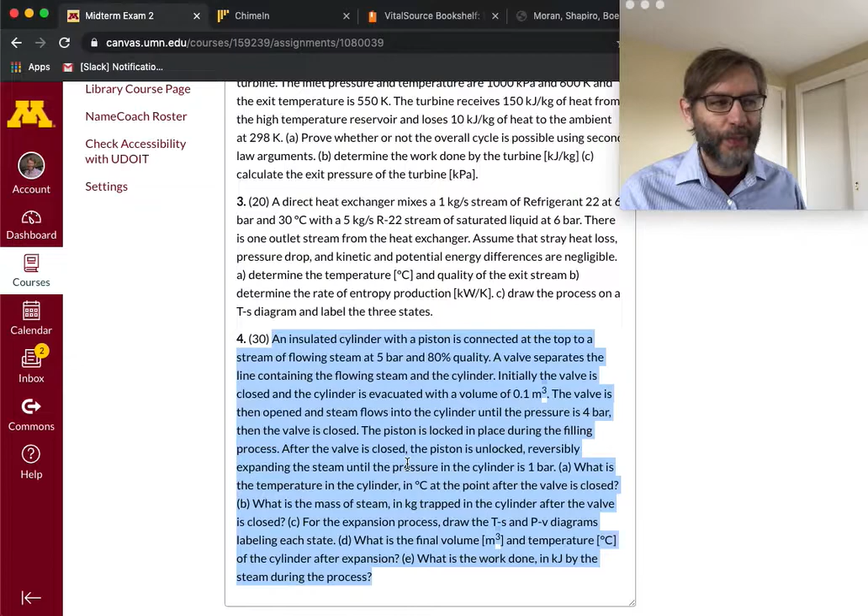Number 4, most people didn't get to. Number 4 is a hard problem, so I expected people would have trouble with this one. This was the one where I'm hoping people got through 1 through 3, and then for number 4, you just did as much as you could.

Number 4 was hard — a transient problem that involved steam flowing in a pipe, and then the steam going into a piston, which then was locked and then expanded. So that's kind of a tricky situation. We definitely covered this material in class, though what you needed to do to get to this is difficult.

Here's what I'll do: I'll grade the exams with the TAs, hopefully next week, and then I'll publish a video lecture going through the solutions, so you have an idea as we go towards the final of what we expect and how to put these things together.

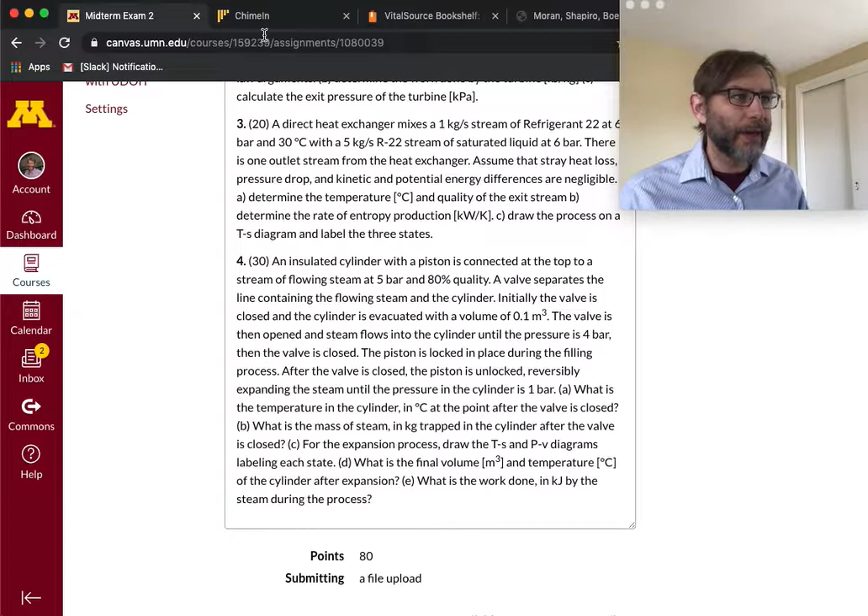All right, let's move on from the exam and start talking about the new material. What we have to do today is finish up chapter 6. I really just want to be done with chapter 6 so that Monday, fresh start, we can start on cycles and start talking about cycles. We only have a couple weeks left of the semester.

Lola's upset about the exam too. Come here, Lola. Yeah, she was stressed out too. Yeah, see, she's stressed out right now.

Okay, all right, so let's see. Let's look at the survey from last time.

So the survey from last time is for an incompressible substance, the change in entropy for an isentropic process. As you remember, isentropic processes are adiabatic and reversible. Is dependent on, choose one,

Only temperature. Temperature and pressure would have been the right answer if we were talking about a gas, like an ideal gas. But when I said incompressible, I mean a liquid, and for a liquid it's only a function of temperature. For an isentropic process there shouldn't be any heat transfer - it's adiabatic, so pressure only is not correct.

So yeah, most people got this one correct.

Let's move on to new material here. One thing I want to cover first and get out of the way is to talk about these tabulated values of PR and VR.

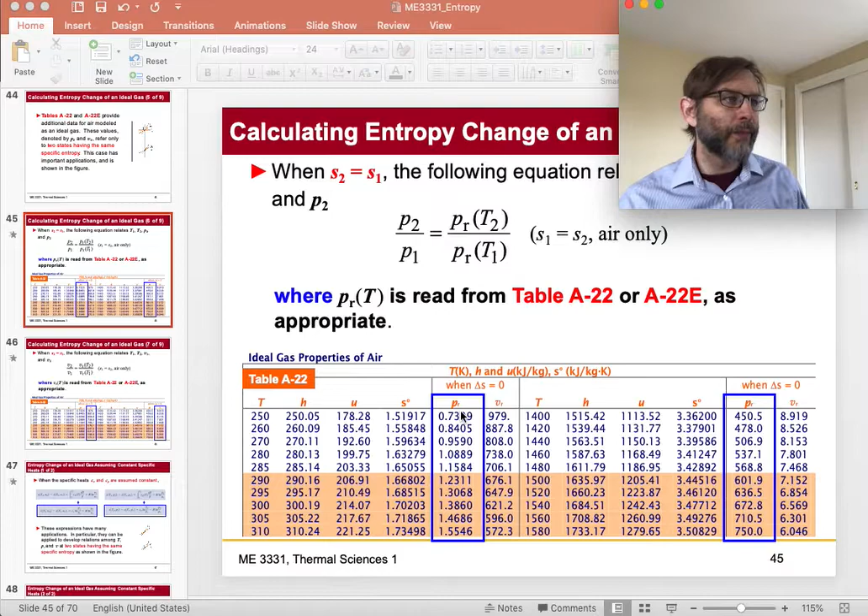So PR and VR are for talking about reversible - oh sorry, let me just get rid of this. So what we're talking about is a process where S1 equals S2, a reversible process with no heat transfer, so that'd be an isentropic process.

S2 equals S1. So if we want to find out for an isentropic process how to calculate the pressure change or the volume change, we can essentially - this is based on the TDS equations we developed last lecture - say P2 over P1 equals PR at T2 over PR at T1.

So these are just like a pressure ratio. What you can do is use this equation and use the tables to determine what the pressure ratio would be for an isentropic process. It's pretty straightforward - we're going to do an example that uses this a little bit later.

So I just want to let you know, you can use this S naught thing and look up S naught with a pressure correction, which is what we've been doing so far. Or you can use these PR and VR, and look in the air tables, for example.

So this is only for ideal gas, or any ideal gas. For the air tables, you can look up PR and VR for isentropic processes and understand the pressure and volume ratios very easily using those tables.

Okay, so yeah, we'll do an example of this. It's pretty easy to use and maybe a little bit of a shortcut if you want to do an isentropic process. Otherwise you can just use the TDS equation on the ideal gas entropy change that we were using before. VR is the same.

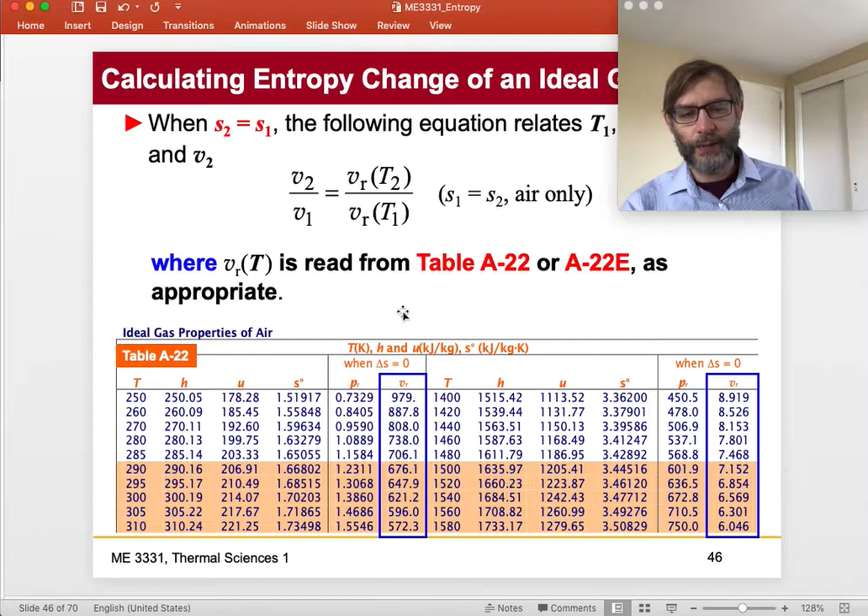So V2 over V1 for an isentropic process equals VR at T2 over VR at T1. So then we'll do an example of this. But this is only for air, for this table, and for ideal gas, and for isentropic process where S2 equals S1. Okay, we already covered this.

So I just wanted to get through that stuff from last time. We talked about the isentropic relations, T2 over T1, P2 over P1. That's always really nice to use for an ideal gas. We didn't do that in the exam, but you can expect we'll do something like that in the future.

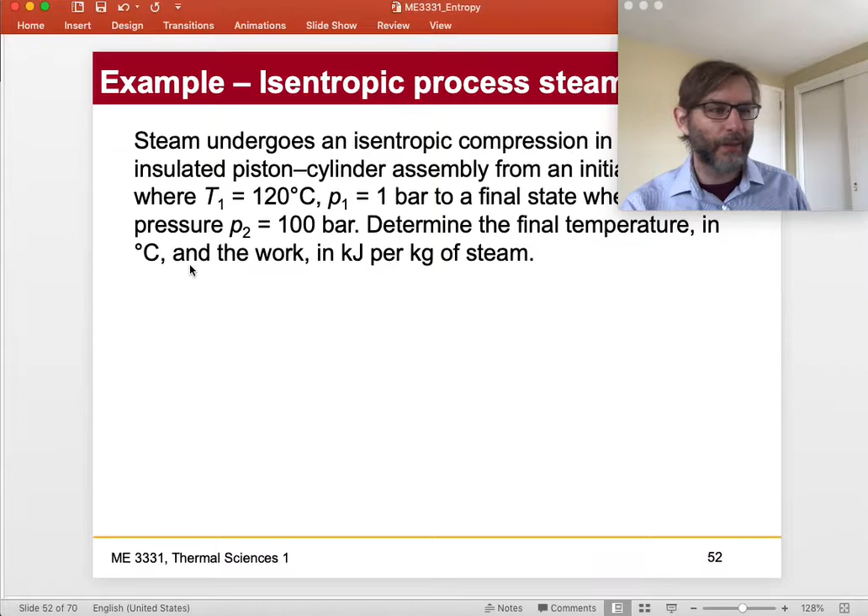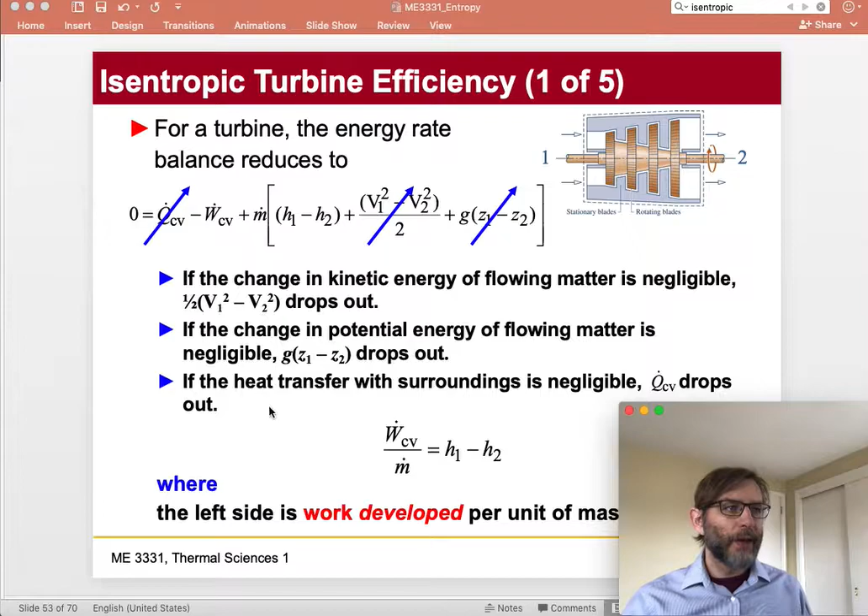Now for an isentropic turbine, we have the second law, entropy balance. So the entropy balance is 0 because it's steady state, so dS_CV/dt equals 0.

Adiabatic, right? So it's isentropic, so this goes to zero. Essentially what you have for any turbine is the rate of entropy production over m dot equals S1 minus S2, which is greater than or equal to zero. So when you have a reversible turbine, which is the isentropic case, you have S1 equal to S2.

If you look at this diagram, the Mollier diagram, the H and S diagram, you can see that for an isentropic turbine you have 1 to 2S, which is the expansion from 1 to 2S, and then you have the actual, which is 1 to 2, which is the case where you would make entropy. So the state labeled 2S in the figure would obtain only in an isentropic expansion from the inlet state to the specified pressure. We would have 2S only in the absence of internal irreversibilities.

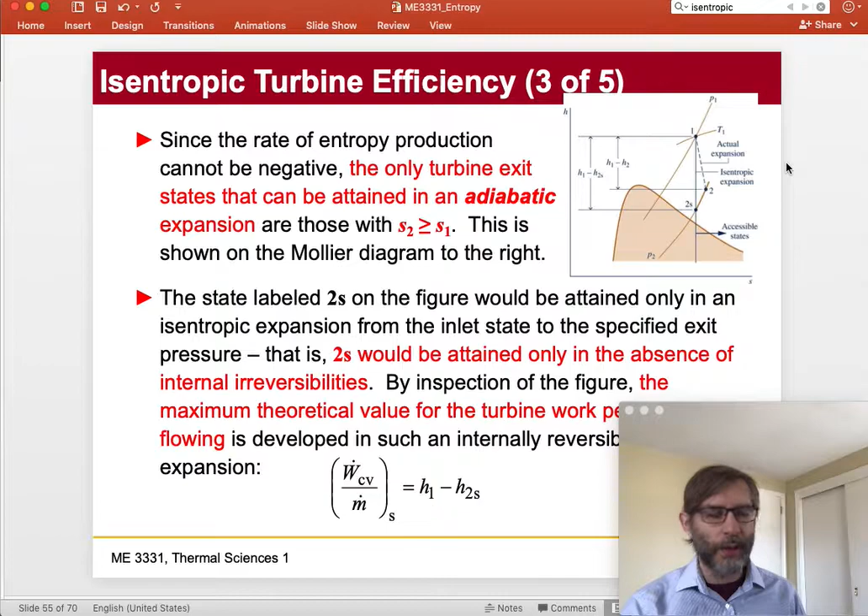So the maximum theoretical work that you can make from the turbine would be H1 minus H2S. The specific work, in kilojoules per kilogram, would be H1 minus H2S. That's the maximum amount of work you can develop in a turbine. Similarly, for a compressor, we go the other direction. You'd be compressing, but similarly, the lowest amount of work you would put in for a compressor would be H2S minus H1.

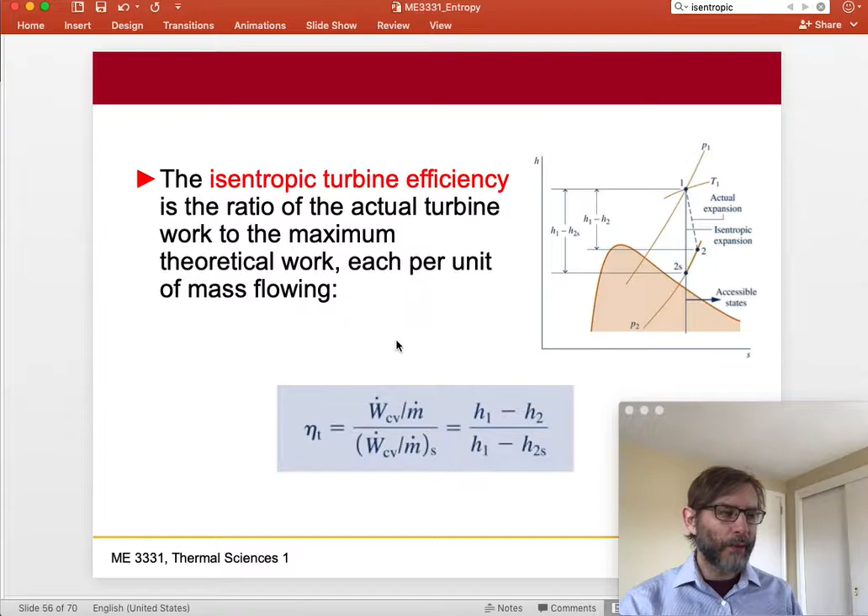So therefore we can define an efficiency metric, which is sort of what we did in an example last week. You can have this work over the work ideal. The actual work would be H1 minus H2 for an adiabatic turbine, and the theoretical work would be the isentropic work over mass flow rate, which would be H1 minus H2S. So this is what we call the isentropic efficiency. Sometimes people call it the first law efficiency of a turbine, but it's nice to call it isentropic efficiency because it's not in over out. It's more like the amount of work you get versus how much work you'd actually get out of the process.

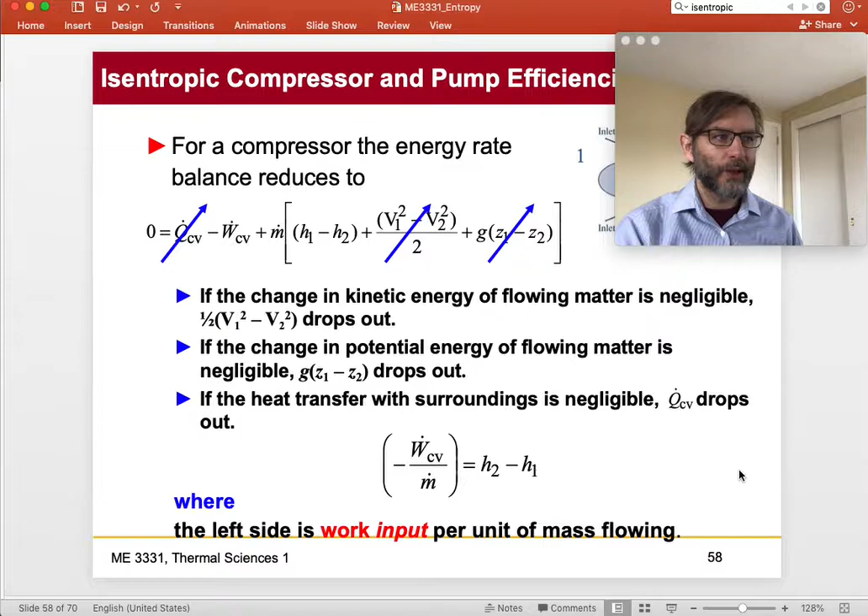We'll do an example of this to show you how it works. Same thing goes for the compressor and pump - they have the same equation essentially. You've got work equals H1 minus H2, just that work is going in, which means the work is negative. You have the same deal: S1 equals S2. This is like the same slide, except you have a compressor on this figure, so it's 1 to 2. Remember, before it was 1 on top and 2 on the bottom - now it's 1 on the bottom and 2 on top. So for 1 to 2 you're generating entropy, and for 1 to 2S entropy stays constant.

Essentially it's the exact same thing, except that the isentropic efficiency here is the ideal over the actual - it's the inverse for the compressor, because the ideal amount of work is lower than actual. You want an efficiency metric to be between 0 and 1. The minimum amount of work you can put in is the isentropic work for a compressor or pump, and the actual work is always going to be higher. So this ratio is going to be below 1, between 0 and 1. The pump efficiency is defined similarly.

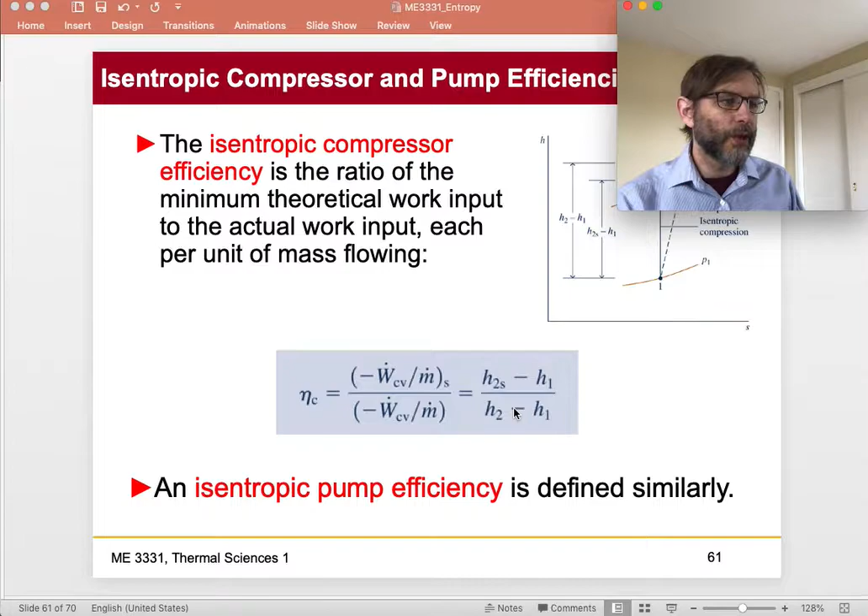I believe there's an example here - yeah, I have an example. Let's do this example, and this is going to be great because it's going to use both. Air enters - you can use the PR as well as the isentropic efficiency stuff. All right, let's get here, let's get my iPad going.

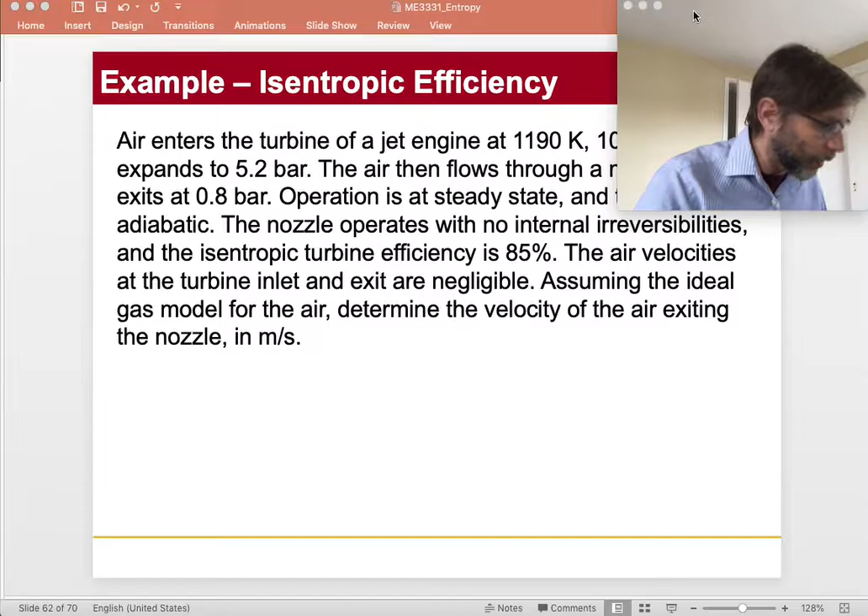So air enters the turbine of a jet engine at 1190 K and 10.8 bar and expands to 5.2 bar. The air then flows through a nozzle and exits at 0.8 bar. Operation is at steady state and the flow is adiabatic. The nozzle operates with no internal irreversibilities, and the isentropic turbine efficiency is 85%. The air velocities at the turbine inlet and exit are negligible. Assuming the ideal gas model for the air, determine the velocity of the air exiting the nozzle.

Okay, so it's a coupled problem, right? But they're giving us an isentropic efficiency. That's what makes this problem interesting. And then so we can figure it out.

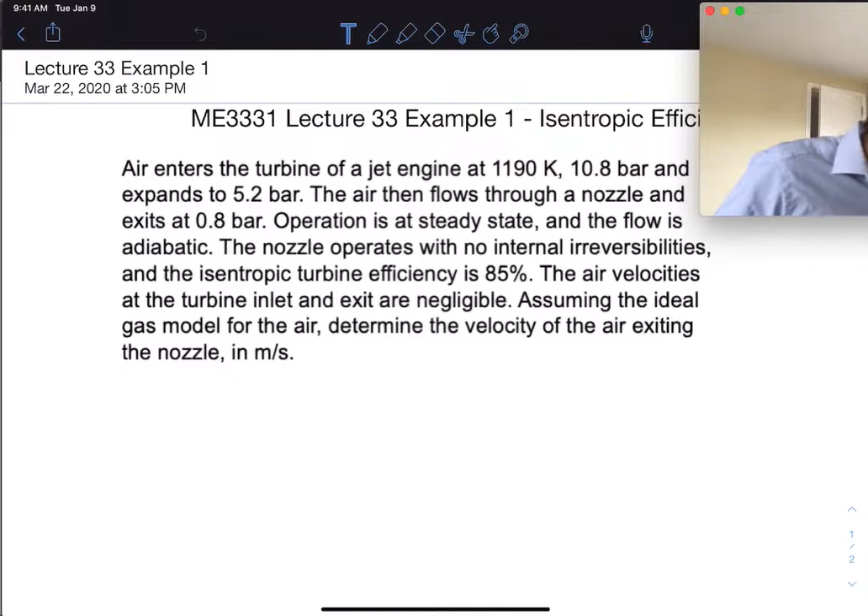All right, Lola, you're gonna have to go somewhere else so I can write. There you go. Okay. Now I got cat hair on my iPad. Okay, all right, it's shedding season.

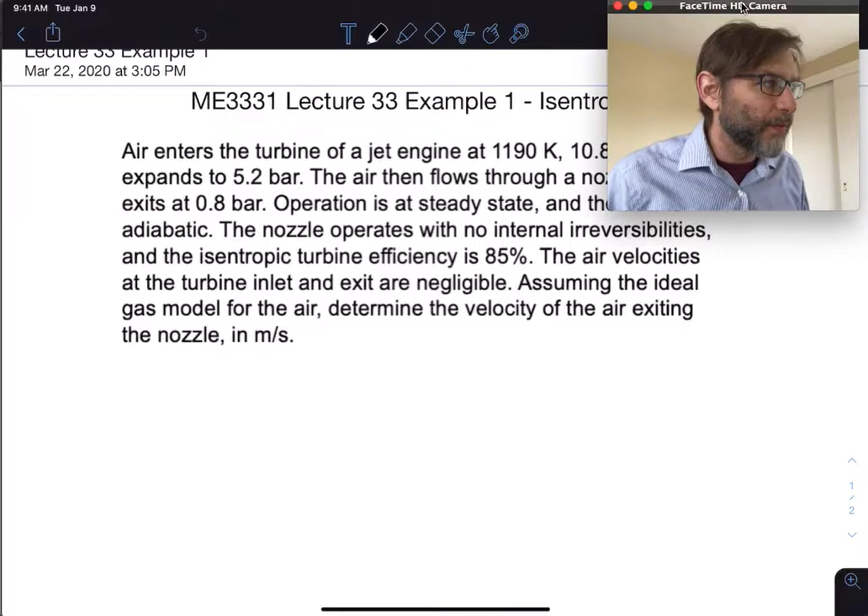All right, so now let's get here. So what are we gonna do? First things first, we're gonna write the known. Somebody asked me this question, as they always do before an exam: should we use known and find in the exam problems? I say yes, because that's what we've been doing, so default, do what we've been doing. I think it's helpful - it gets your thoughts straight on what you're trying to do, it makes you read the problem. Sometimes people miss things in the problem if they don't write it down. It just gets your thoughts straight on what you're going to do. It's part of the normal engineering procedure.

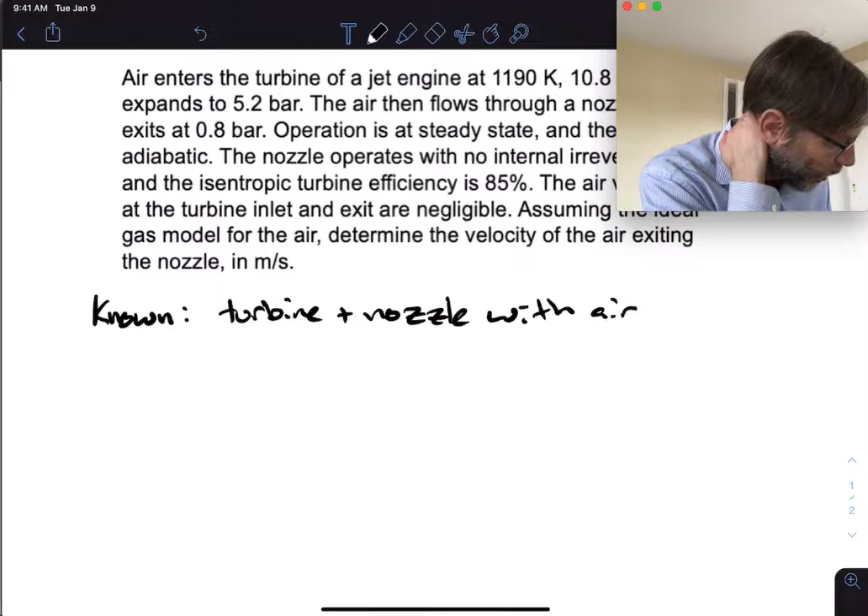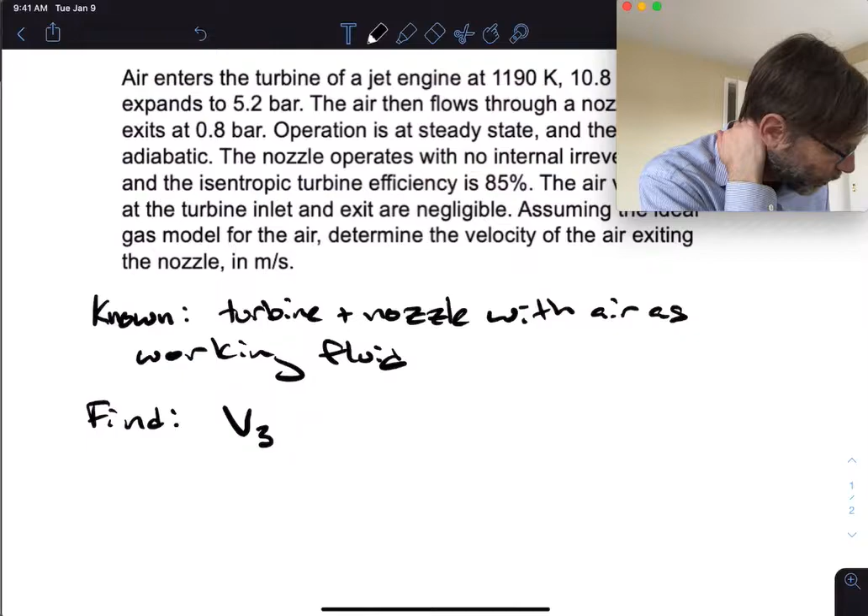So anyways, what's known is that we have a turbine plus nozzle with air as working fluid. What we have to find in this case is the exit velocity, so we're finding v. Well, we're gonna call it v3 because there's two components, right?

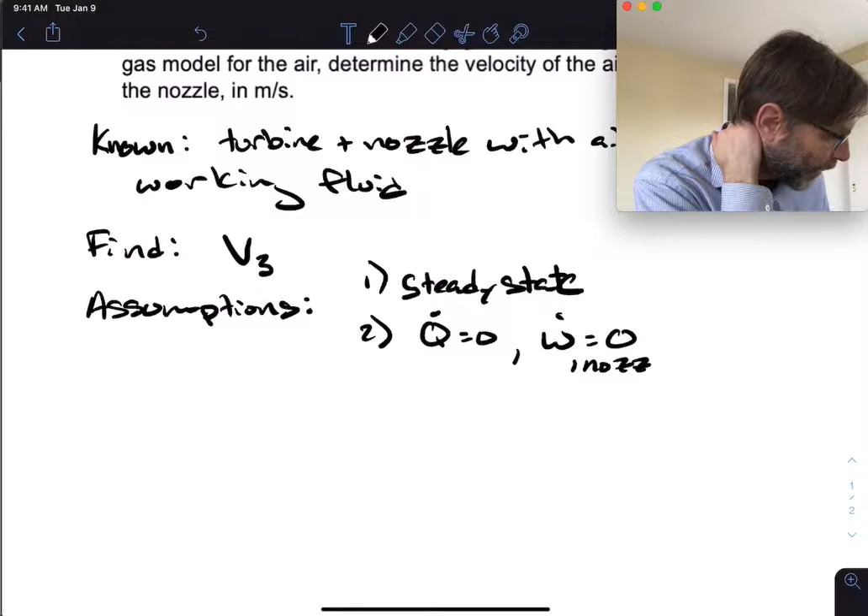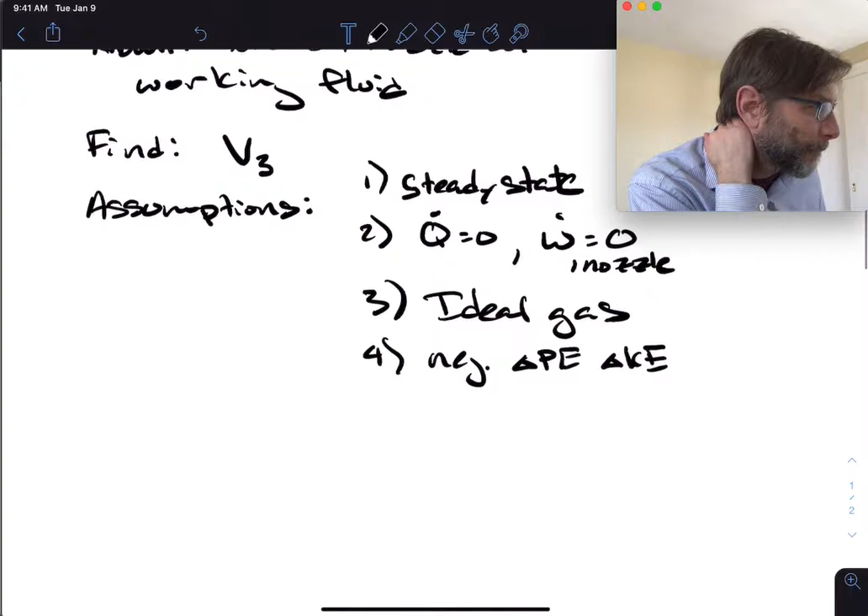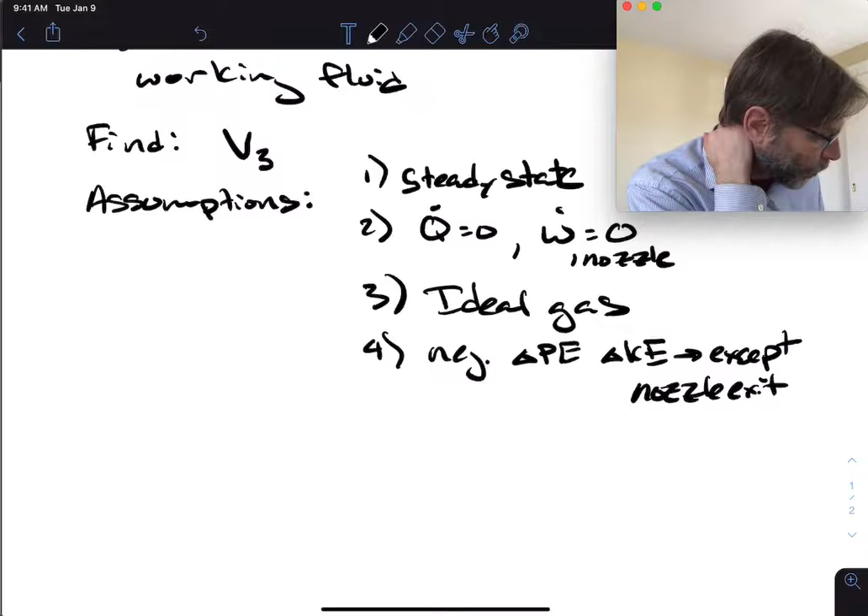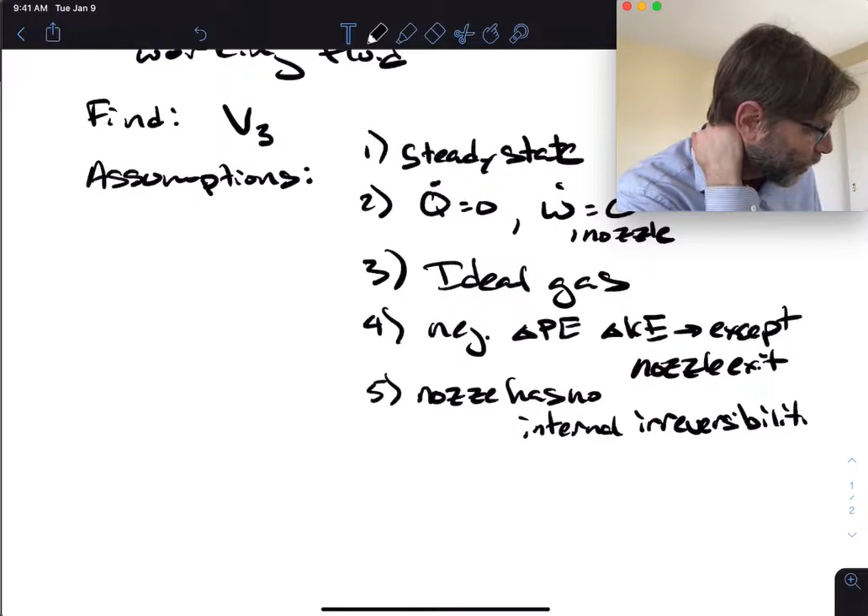So if we make some assumptions here. First, we're gonna say steady state. Second, we are assuming that q dot equals 0, adiabatic, and that work dot equals 0 for the nozzle - obviously the turbine has some work. Third, I think we're going to assume ideal gas. Fourth, we're going to neglect delta PE and KE - I think we're going to neglect KE from the, except at the nozzle exit. And then fifth is going to be the nozzle has no internal irreversibilities. So a lot of assumptions in this problem.

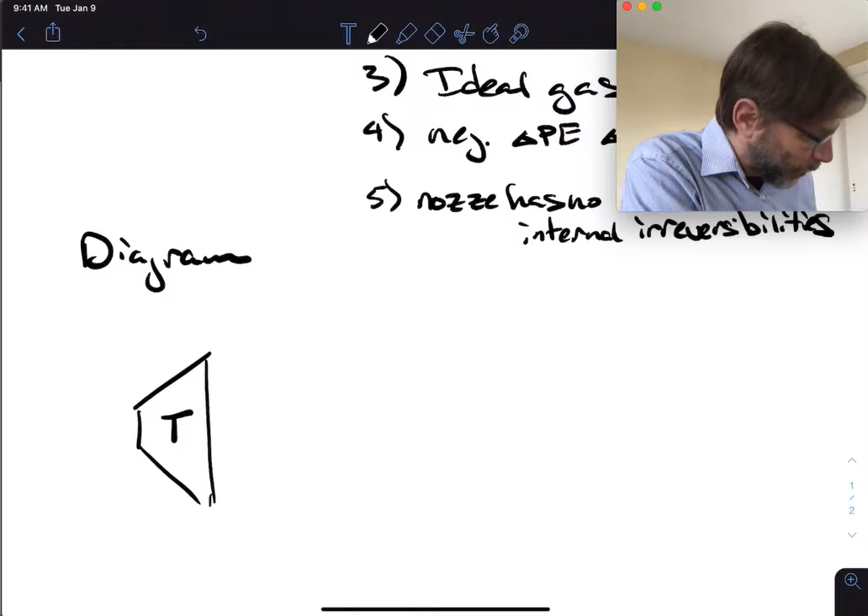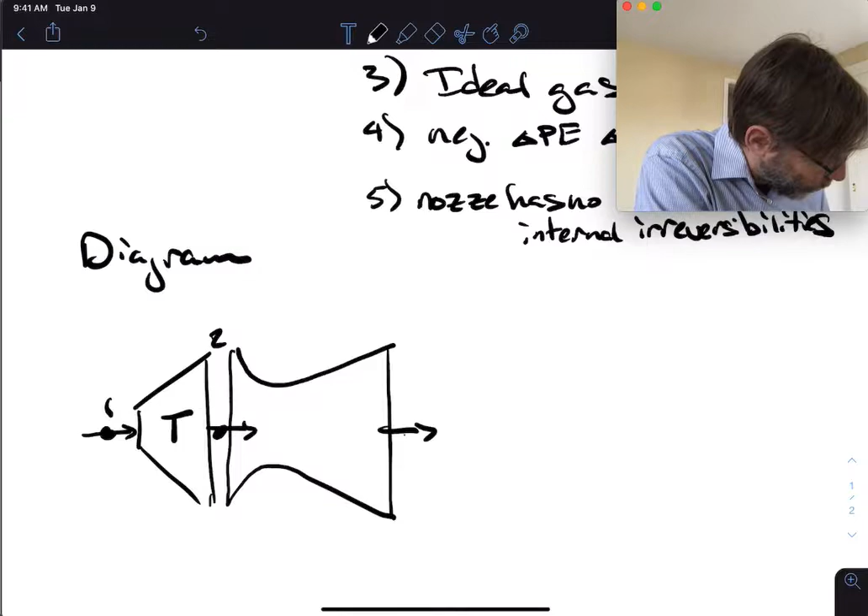All right, let's make the diagram. So to make the diagram, it's going to look like this. There's going to be a turbine, call it T, you have stuff coming in, and it's a radial flow turbine. And then we're going to have a nozzle, so we're going to have some sort of nozzle that looks like this - imagine like a fighter jet or something. It's got a turbine and a nozzle, right? So we're going to call this state 1, call this state 2, and coming out state 3. It's a converging diverging nozzle - it doesn't matter, we could have made it just tapered down or something like that. It's probably a little bit confusing to make it a converging diverging nozzle, but okay.

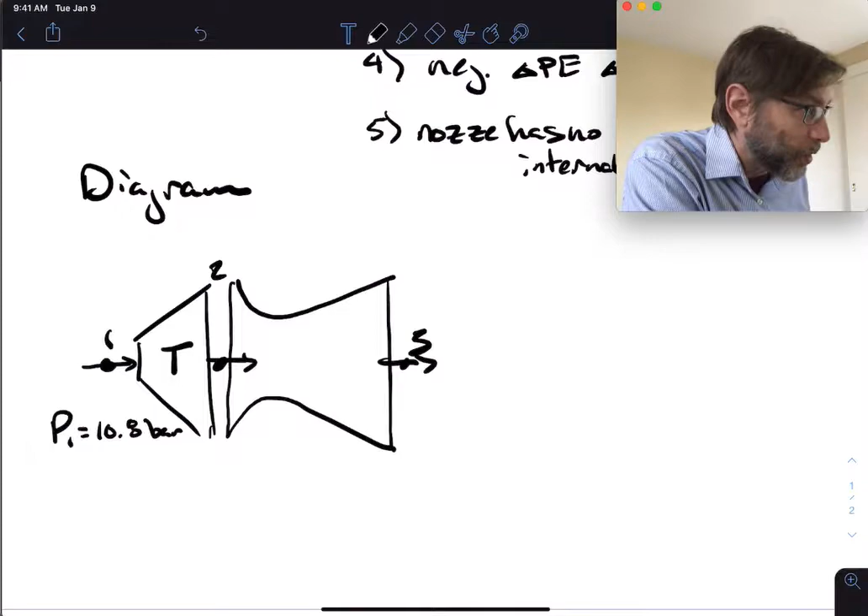What we're given is that P1 equals 10.8 bar, and T1 equals 1190 K. State 2, we have P2 equals 5.2 bar, and P3 equals 0.8 bar. It's a little under expanded.

Okay, we're going to make ourselves a T-S diagram just to explain this thing. And we got different pressures, right? So I'm just going to draw the pressures that we're operating at: 0.8 bar, 5.2 bar, and 10.8 bar. Okay, so now we have two different processes, right? So we have 1 to 2, 2 to 3.

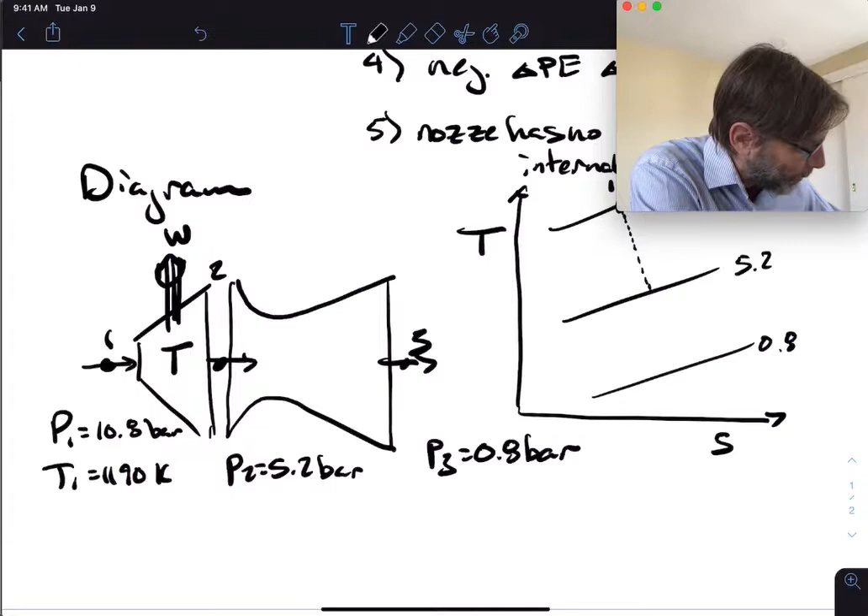So 1 to 2 is expanding through the turbine. The turbine's making some work - I assume it's making some work, work is coming out of this thing, positive. And then what we're going to do is, from state 1 at 10.8 bar, we're going to expand it down to something here, so state 2 is somewhere down here, right? It's an 85% isentropic efficient turbine.

So there's going to be a line here, this is going to be our 2s, our isentropic idealized turbine. Okay, 2s - that looks straight. And then from 2 like this, and then we're going to have from 2 to 3 is actually no irreversibility.

So we're going to assume that this is straight. Ooh, it actually made a straight line, didn't it? How do I do that? I don't know, that was cool though. I should figure that out. I'm really having a hard time making this look straight. All right, that's pretty good.

3 is there. Okay, so this is what we have. This is the kind of TS diagram that we're talking about. We don't know any of the temperatures, I don't think.

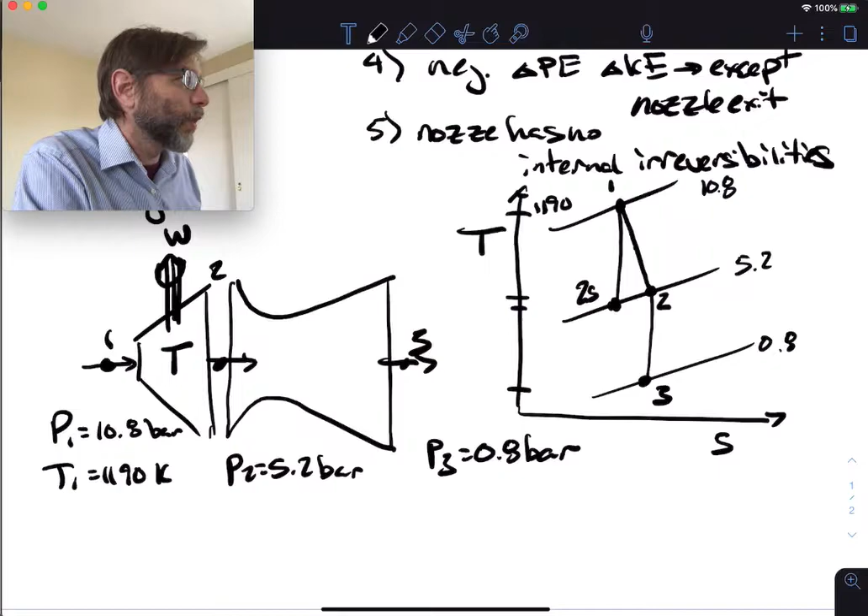Oh yeah, we do. We know T1, so T1 is 1190. We don't know T2, T2S, or T3. We don't know any of those guys. All right, so we have to figure that out. But we do know that we have 85% isentropic efficiency.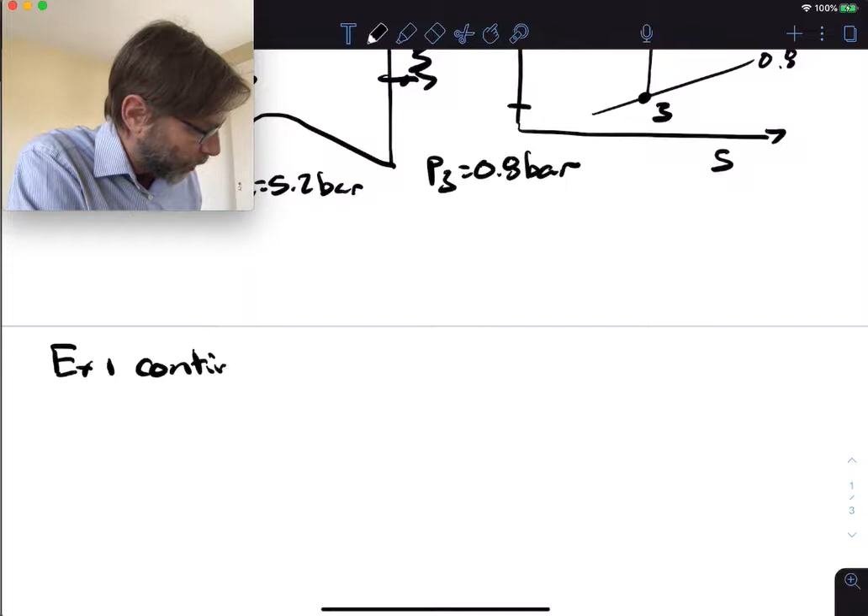All right, so let's do continued here. So now let's put our analysis here. So in our TS diagram, we put as much as we could in there. As you get good at these, and as we do this thermodynamic cycles, you can start making the TS diagram right away. You don't have to make it as part of the problem later, right? You kind of deduce what's going on based on what's happening in the problem statement. And so you know how to essentially draw the diagram roughly right from the beginning, okay? And that's what I kind of would hope you do.

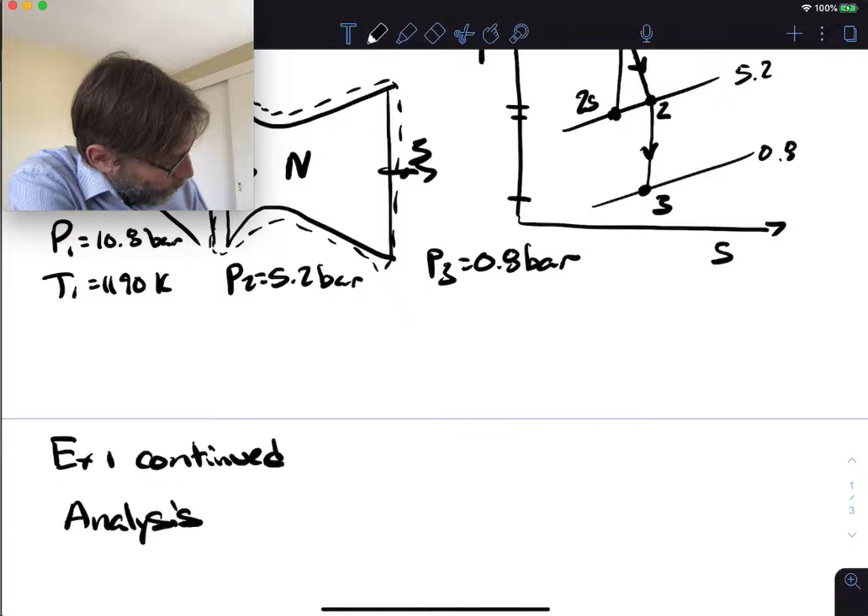So this is a nozzle, right? And then we'll draw our diagram. So essentially we can make the whole thing our system. I don't know if we're going to do that. We're probably going to make individual systems. We'll probably have 2 control volumes, CV1 and CV2. I imagine we're going to analyze them piecewise.

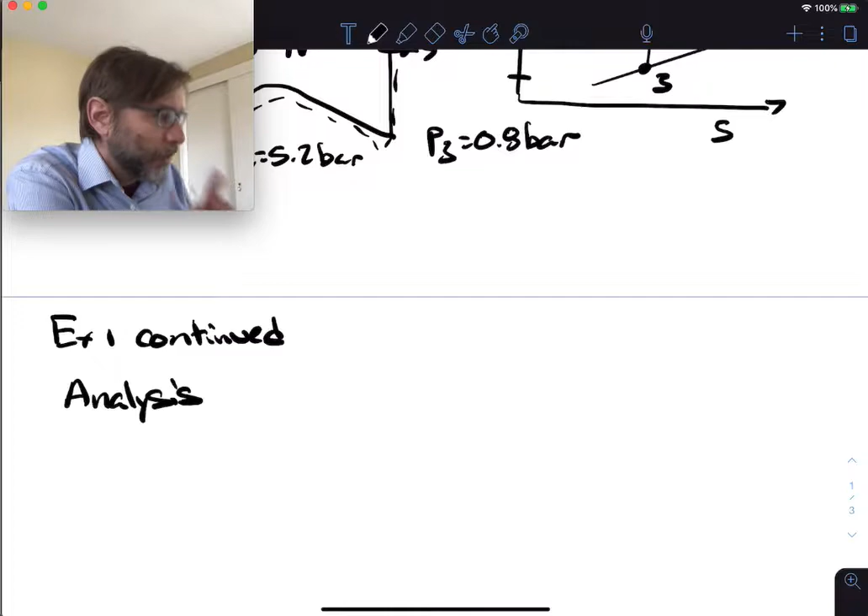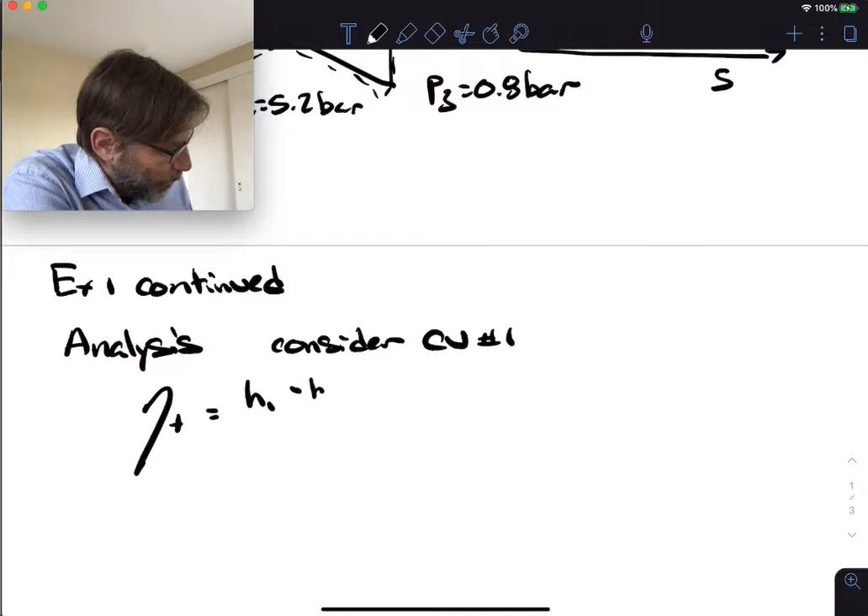Okay, so let's find state 2. So let's consider control volume number 1. Okay, considering control volume number 1, let's just break out our isentropic efficiency. So eta T, which would be the isentropic efficiency of a turbine, would be H1 minus H2 over H1 minus H2S. Okay, so that's the isentropic efficiency of a turbine.

So then we're going to find what H2 is. H2 equals H1 minus eta T times H1 minus H2S. All right, so since we have the temperature at state 1, we definitely know what H is, right? Because we can find that pretty easily. All right, to define H2S though, it's going to be a little tricky.

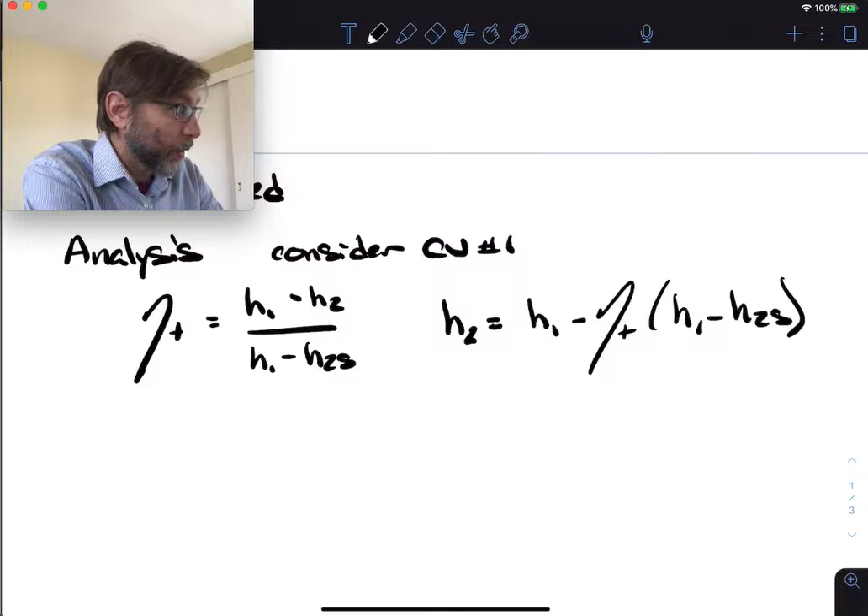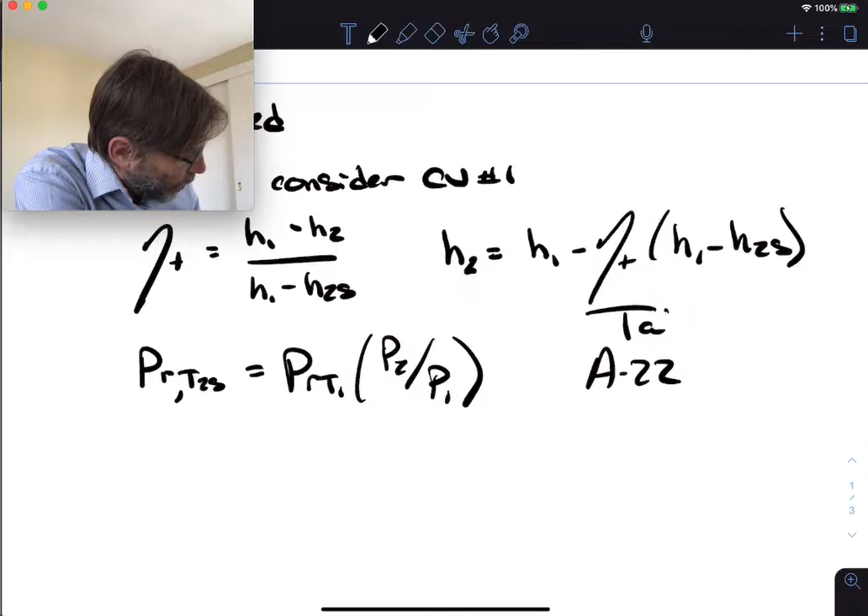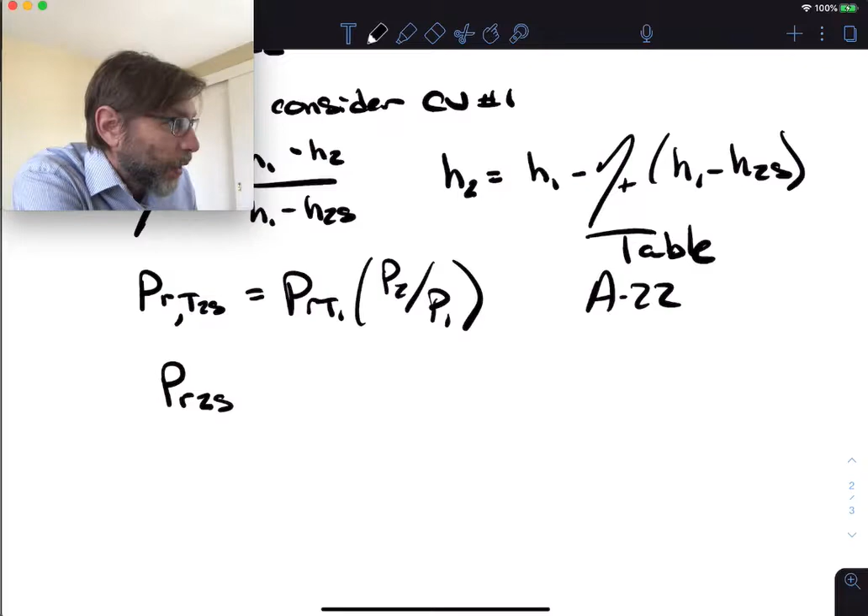Okay, so now what we're going to do here is we're going to use table A22, to find out what's going on here. So PR2, or PR2S, is equal to 230. So that's PR at T1. So PR at T1, we'll just say at 1, PR1 equals 230. And there's no units on PR because it's a ratio, so there's no units on that. But there is units on the pressure. There's just no units on PR and VR.

And then, so we know the pressure ratio, so we can find out what this is. So if we look it up, we can just sort of interpret that T2S... oh, I'm sorry, I will go back. I went a little too far. PR2S is equal to 230 times the ratio of 5.2 over 10.8. Okay, and this is equal to 110.8, and so this is PR2.

So if we look at this at the table, we're going to get H2S is essentially equal to 1038 approximately, and T2S is approximately equal to 992K or 993K. Okay, all right, so we have 990... this is kind of poorly written. All right, 993K. Okay, now, so then we can find H2.

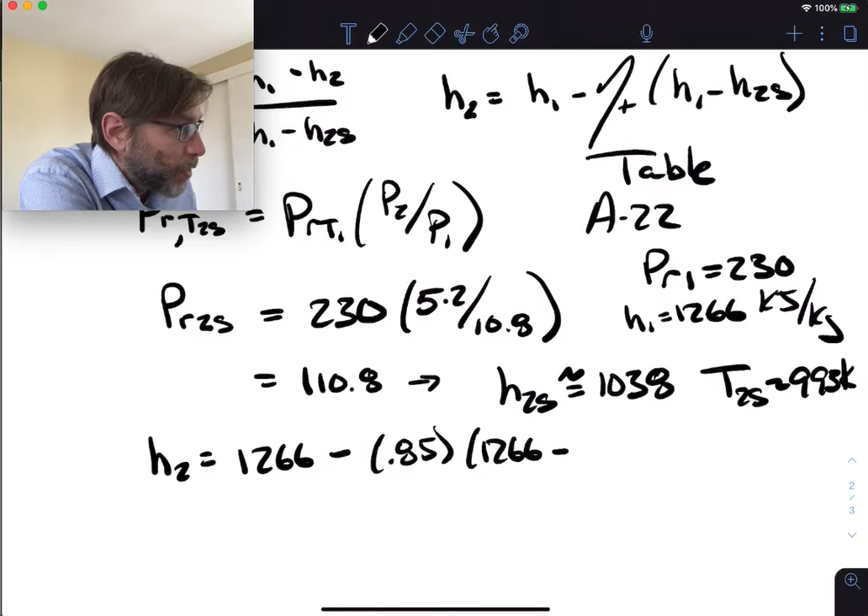So H2 actually, so we don't have to look that up on the table. We just use the isentropic function, and we get H2 equals 1266, which is, I said, what H1 is. So H1 equals 1266 minus, 1266 minus 0.85, which is the isentropic efficiency, times 1266 minus H2S, which was 1038. Okay, and this ends up giving us something like H2 equals 1072 kilojoules per kilogram.

Make sure I put my units in here. Okay, kilojoules per kilogram, so that's H2. Now interpolating, we can find T2 is equal to about 1023K, and PR2 is equal to 124.7. So now we have PR2.

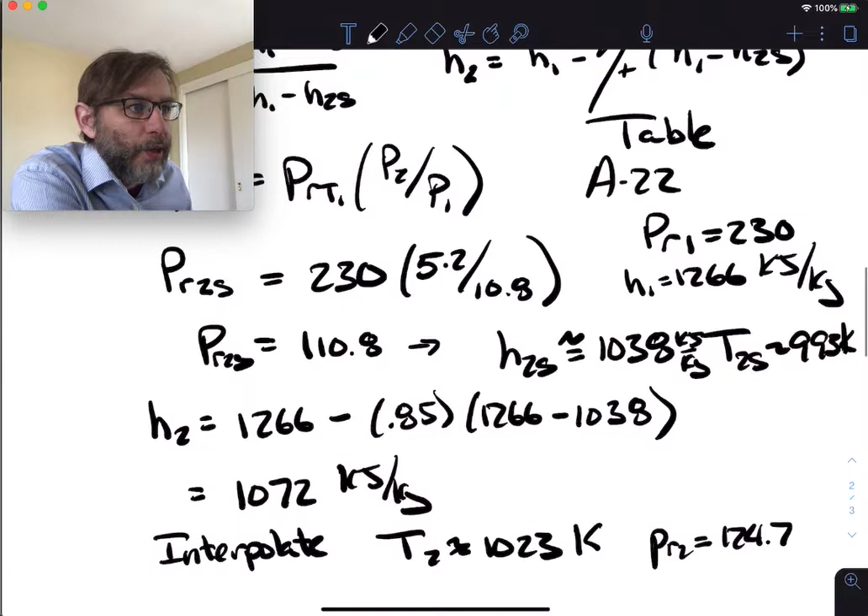So we have PR1 and PR2S. PR2S is... I'm sorry, 110.8. But now PR2 is actually 124.7. Make sure I get this right. So this is PR2S up here, which is 110.8, and PR2 is 124.7.

Okay, and now we can find out for the nozzle, for control volume 2, from state 2 to 3, we have PR3, which is at the isentropic condition, because it's an isentropic nozzle, which doesn't really happen, right? You don't really have an isentropic nozzle, but okay, so we assume we have an isentropic nozzle. PR at T2,

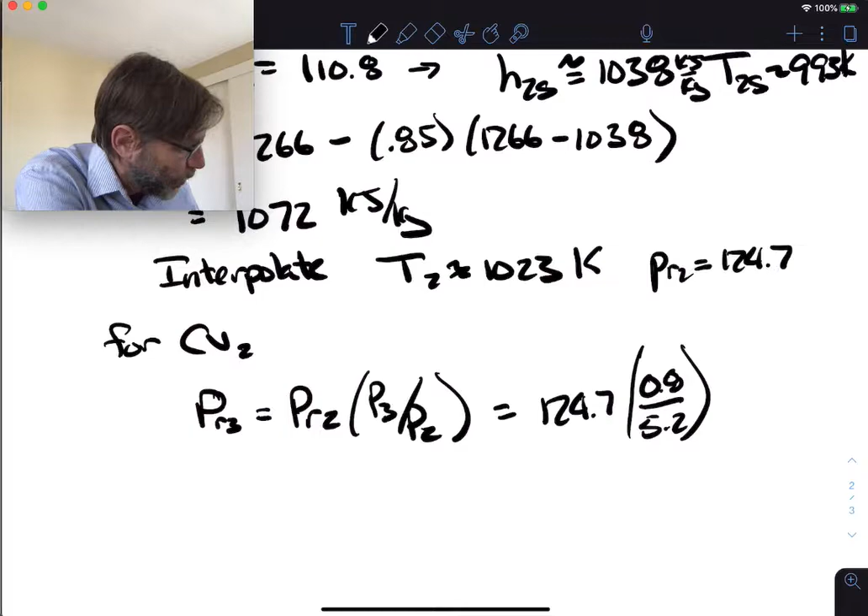and then P3 over P2. So using the PR function again, we end up getting 124.7, which is PR2, times the ratio of the pressure, which is 0.8 over 5.2. And this ends up getting us a PR3 value of 19.191 from the table.

And then we can interpolate that as H3 equals H3S, which is the isentropic enthalpy, which is 634 kilojoules per kilogram. And the T3 is equal to 625.6. All right, so now we know what that is.

Now, the only thing we have to do now is figure out what the velocity is, okay? So for that, we're going to use the first law for control volume 2. So 0 equals Q dot minus W dot plus M dot times H1 minus H2, and we'll skip the potential energy, and put a square bracket here for V2 squared over 2 minus V3 squared over 2.

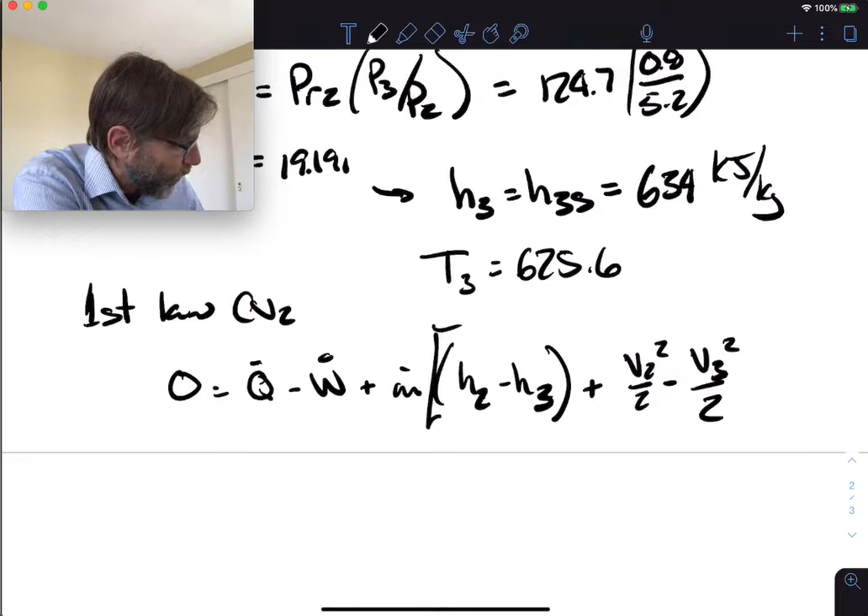I'm sorry, this is supposed to be 2 and 3. And then, based on our diagram, this guy goes to 0. We assume this is 0. We're assuming the kinetic energy is negligible at the inlet to the nozzle, but at the outlet to the nozzle, it's something.

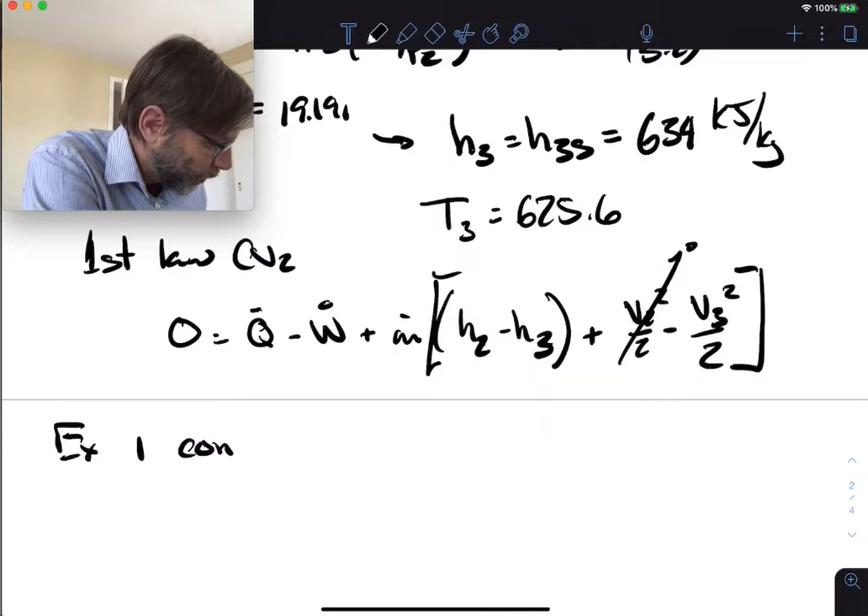Okay, so continuing now, all we have to do is find this. So V2 - this term goes to 0 in the nozzle, and this term goes to 0 in the nozzle as well. So really all we're left with is V2 equals, and the M dot drops off because it's divided by 0.

So V2 equals the square root of 2 times H2 minus H3S, okay? And then this ends up being 2 times H2, which we already know is 1072, minus 634. And then, of course, we have to do this 1000 correction, usually to get the kilojoules into joules per kilojoule.

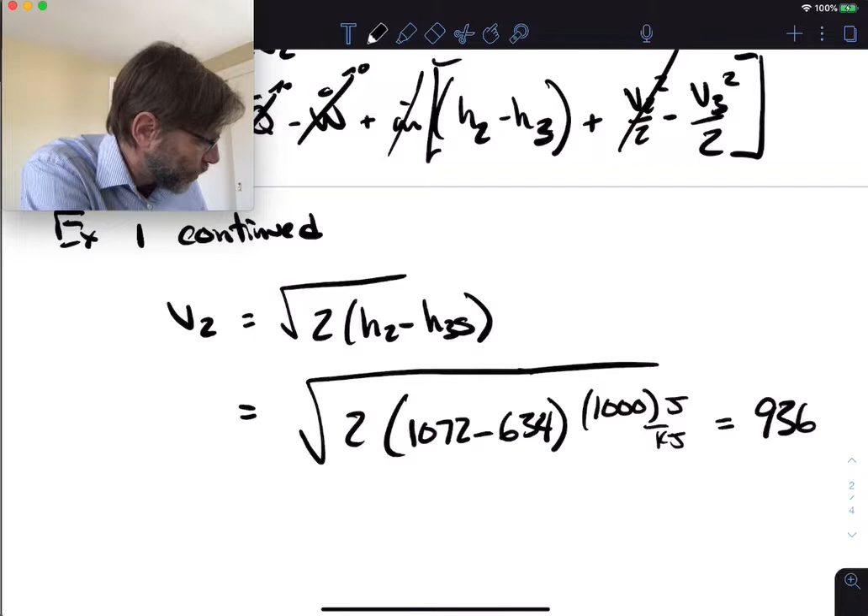And then this ends up being, to get us to meters per second, so 935, essentially 936 meters per second. When you're doing the velocity stuff, you got to make sure you have that factor of 1000 in there, or else you're going to run into trouble with the kilojoules. All right, so that's the answer.

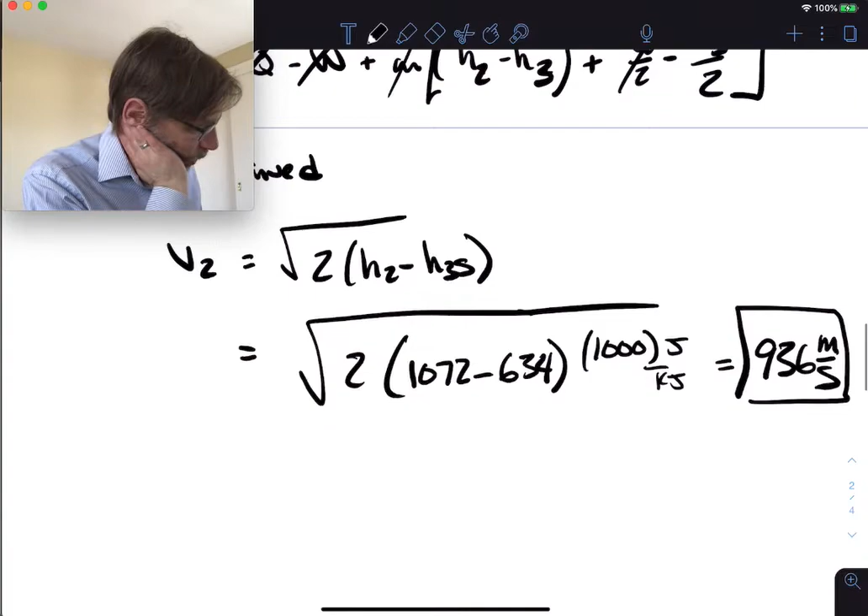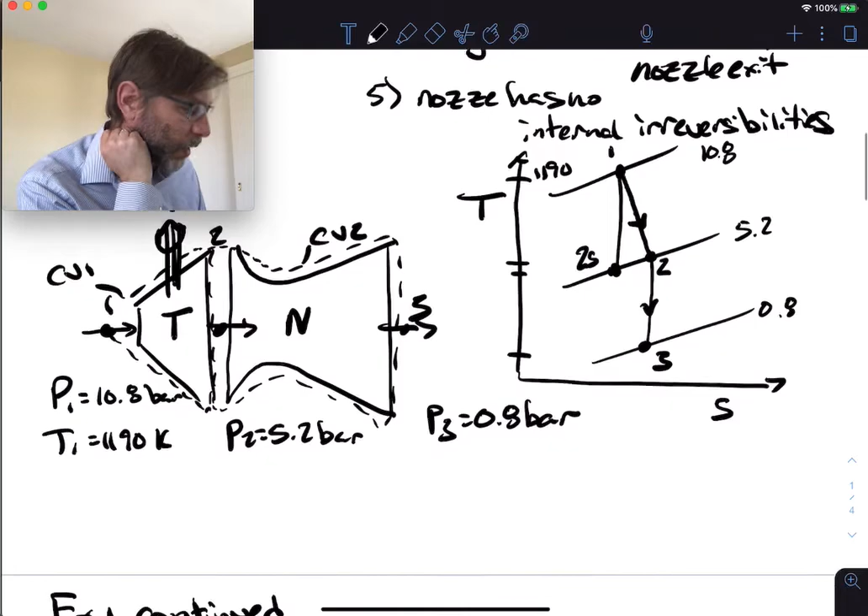So now we've kind of shown that this is really useful. This PR is really useful for isentropic processes. It's sort of a way to easily use the tables for isentropic processes. And even though the turbine itself wasn't isentropic, we can use the isentropic enthalpy and temperature to solve for the real one using the isentropic efficiency. Okay, so hopefully this example gives you a good sample of what to do.

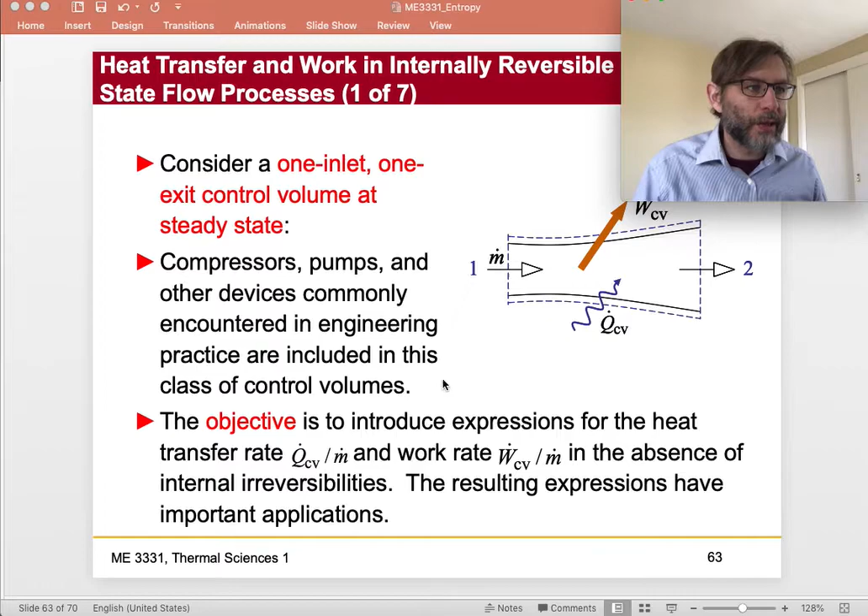All right, next thing I want to do is talk about heat transfer and work in internally reversible steady flow. Consider a one inlet, one outlet control volume in steady state. We have a lot of things like this: compressors, pumps, nozzles, valves, other things like that. The objective is to introduce expressions for the heat transfer rate and the work rate in absence of internal irreversibilities. The resulting expressions have important applications and are something we want to examine.

So the agreement of the discussion on energy transfer by heat to a closed system doing an internally reversible process, we have this - reversible means the sigma goes away, right? So we have Q over M dot, so this is some Q of the CV, equals the integral from 1 to 2 of T dS, right? Where the internally reversible subscript shows that the expression applies only in the absence of internal irreversibilities, i.e. when sigma is 0, okay?

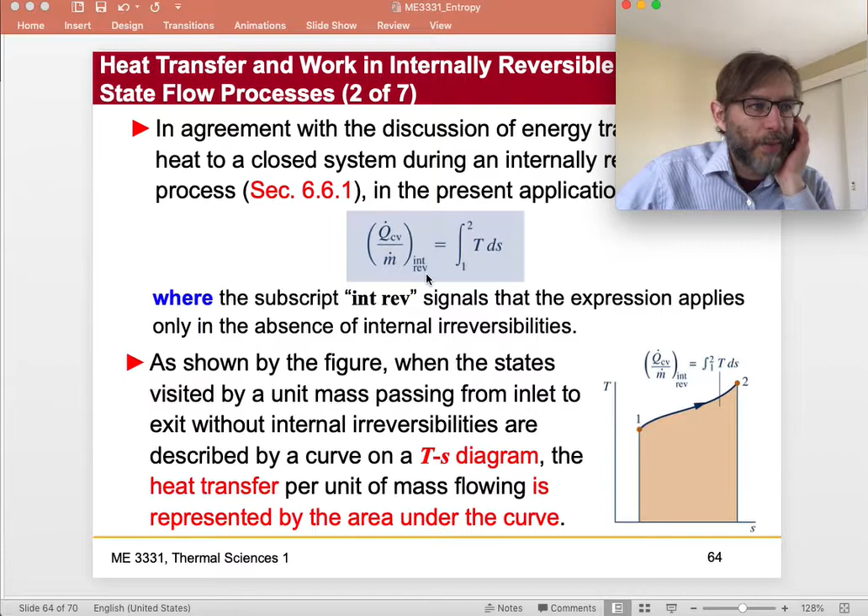As shown by the figure, when the states visited by a unit mass passing from inlet to exit without internal irreversibilities are described by a T-S diagram, the heat transfer is the area under the curve, which we know. Now, neglecting both kinetic and potential energies, an energy rate balance for the control volume reduces to the following, for one inlet, one outlet.

You'd get rid of kinetic and potential. You end up getting work equals Q plus H1 minus H2. And then you end up putting the Q in from the second law entropy balance into the first law, so you get work, little w, work over m dot equals power over m dot, equal to the integral of TdS plus H1 minus H2.

So entropy and pressure changes are related by the TdS equation, and we can integrate this for the exit, and we get the following: TdS equals H2 minus H1 minus VdP. When this relation is combined, we end up getting the following expression: for an internally reversible process, the work is equal to negative VdP.

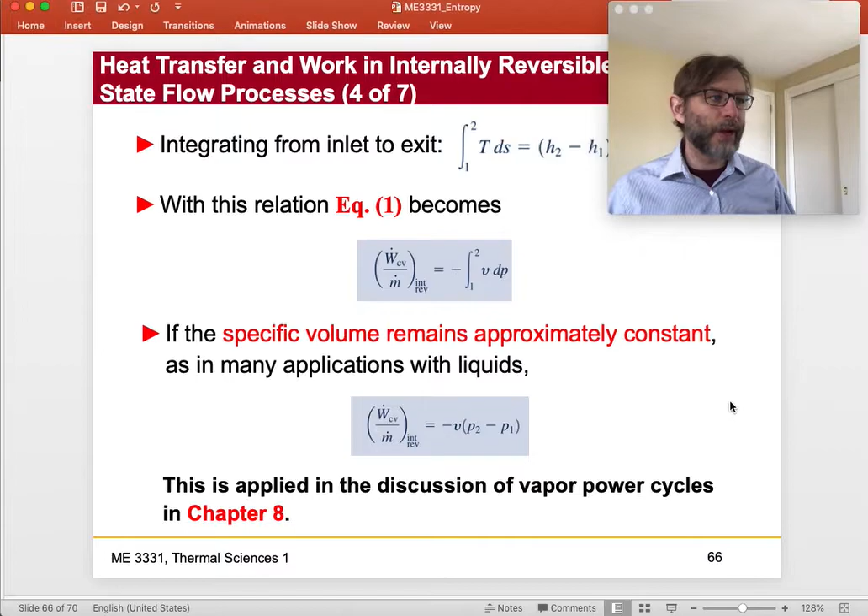So this is confusing because we said very early on in the class that work equals PdV, not VdP. However, for an internally reversible process, a steady flow process between a single inlet and outlet, the internally reversible work is equal to VdP. I think this is really important, especially when we get into vapor power cycles, like the Rankine cycle, which we'll talk about.

So this is an important feature we need to understand. As shown in the figure, when the state visited by unit mass passing from inlet to outlet without internal irreversibilities is described by a curve on a PV diagram, the magnitude of VdP is shown in the area behind the curve, to the left of the curve, so the integral of VdP.

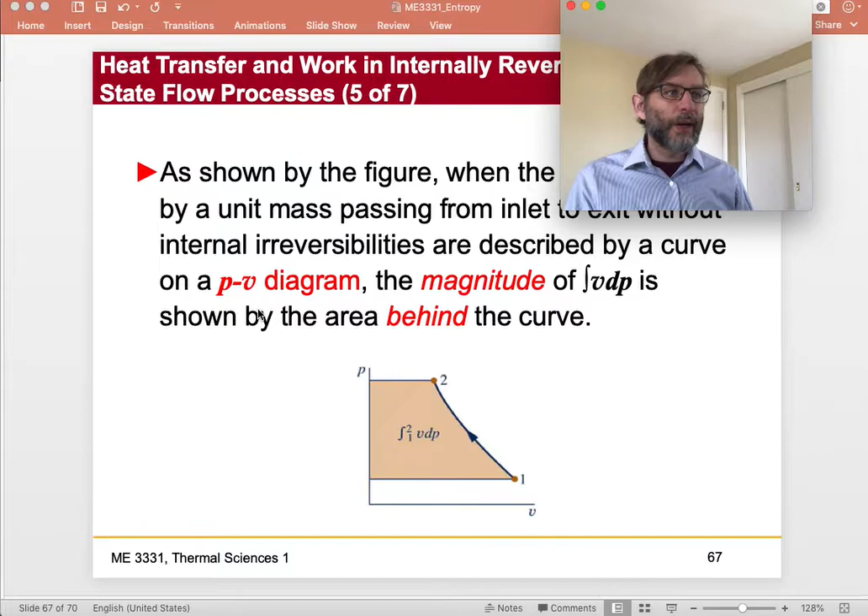All right, so let's see. With PV equals constant, the internally reversible... so we assume it's polytropic, but it's still internally reversible. That way you can use this work equals negative VdP. Now notice that it's not adiabatic, it's not isentropic, but it's internally reversible. So assuming there are no internal irreversibilities, we can use this equation, negative VdP.

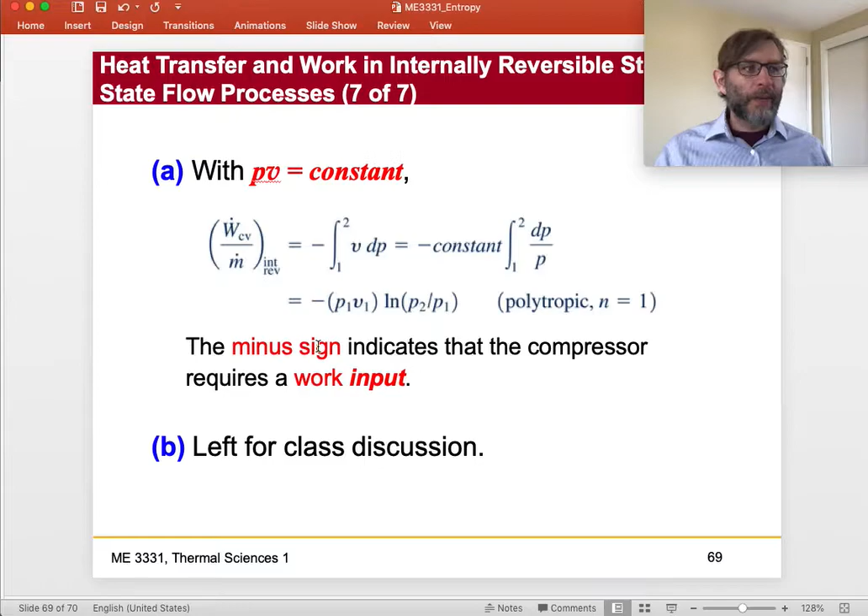We end up getting here, solving the integral essentially VdP, the following for the polytropic process with n equals 1. We could do this for a number of different work scenarios, and probably if we were sneaky, we could end up getting the same equation we got before for work. The minus sign indicates that the compressor requires work input. Okay, left for class discussion.

Okay, let's do an example of this. I don't want to get hung up on the VdP thing. I just want you to know that VdP, the integral of VdP, is for an internally reversible process, a control volume process. It's very specific when you can use that equation.

Only for those types of processes. It's a little confusing, but it's definitely handy when talking about internally reversible pumps and compressors, which we'll deal with when we cover the Rankine cycle and other cycles later. So that's why I'm introducing it. I don't want to confuse you, but we definitely could use it, and will, in a lecture or two when we talk about that.

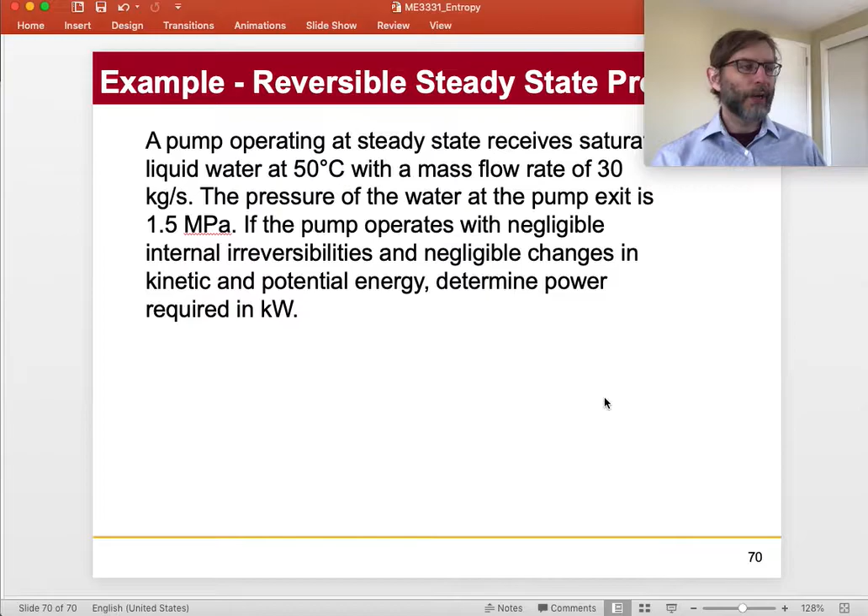Okay, so let's do an example. I have one more example to do, and then we can quit for the day. Okay, so example 2, here we go. A pump operating in steady state receives saturated liquid water at 50 degrees C, saturated liquid water -- that means we're at the left part of the vapor dome -- and a mass flow of 30 kilograms per second.

The pressure of the water at the pump exit is 1.5, so we pump it up from... it doesn't say what the inlet pressure is. If the pump operates with negligible internal irreversibilities and negligible changes in kinetic and potential energy, determine the power. So did we say it has no, operates with negligible internal irreversibilities -- it's a frictionless pump. Okay, wow, cool. Okay, so let's do that.

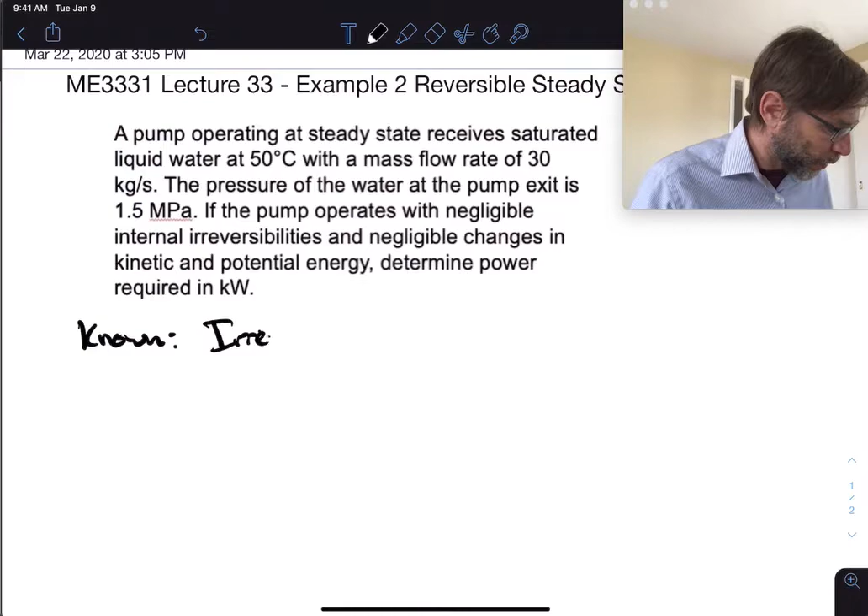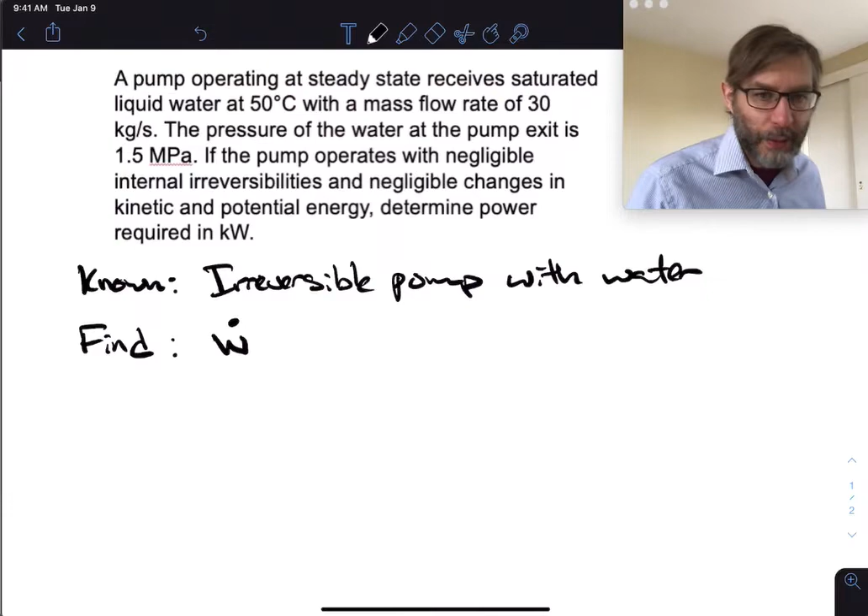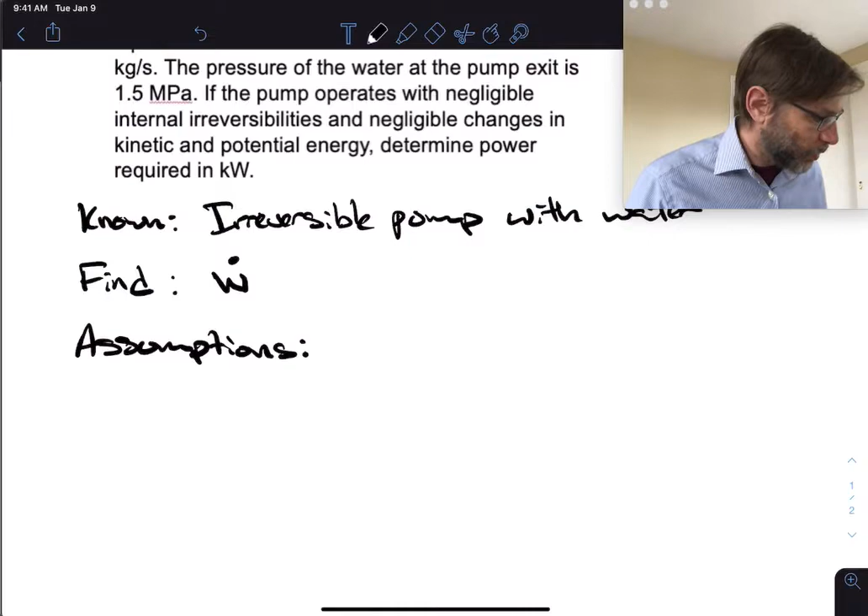So it's a pretty simple problem, so let's just do it. Known: we have an irreversible pump with water, with the properties known, we're supposed to find the power required. So we're supposed to find W dot, big W dot, which is power in kilowatts. Assumptions: so the assumptions are that, one, the control volume, so we have a steady state.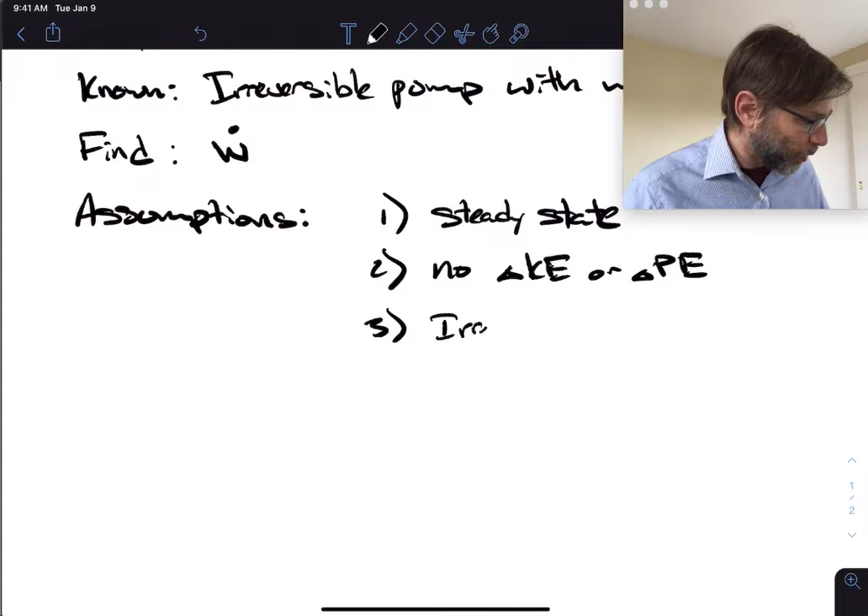Second, we're going to assume that we have no kinetic or potential energy changes. And the third one is that it's irreversible, internally irreversible. Okay, the diagram looks like this.

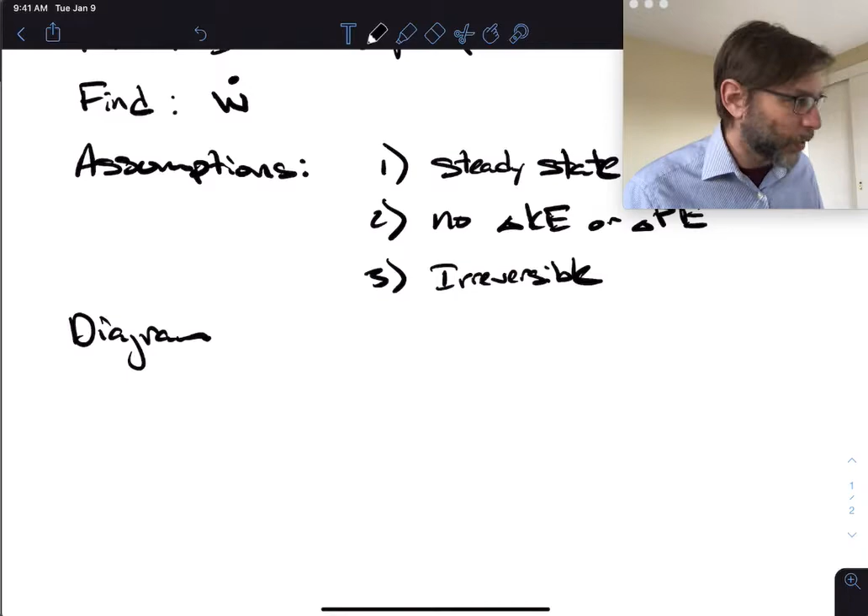We don't need to make a TS diagram for this one. I'll just draw it like a pump. We have water coming in and water coming out. This is the universal symbol for a pump, and this is my control volume.

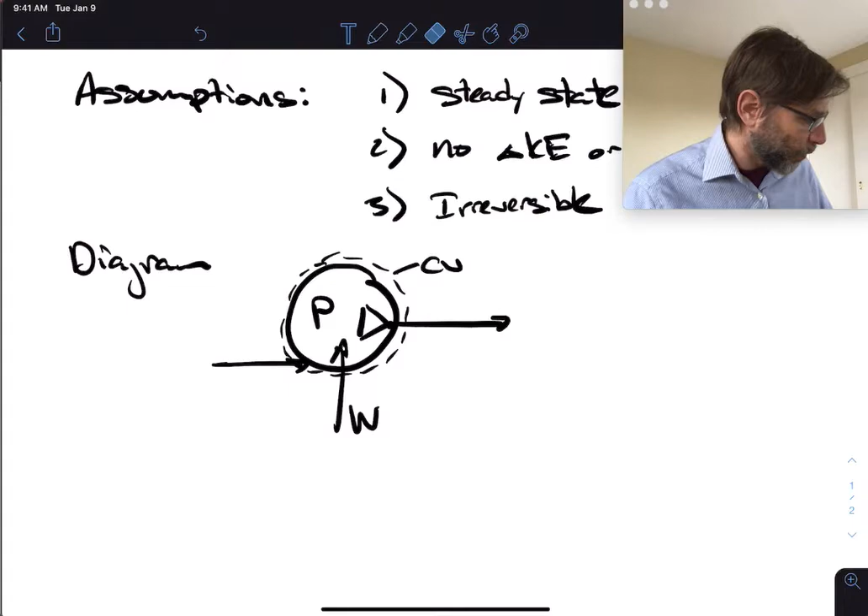We have some work going in. Actually, we always draw work going out, right? So this could be negative work. And there's no Q, right? Because it's adiabatic, I believe, right?

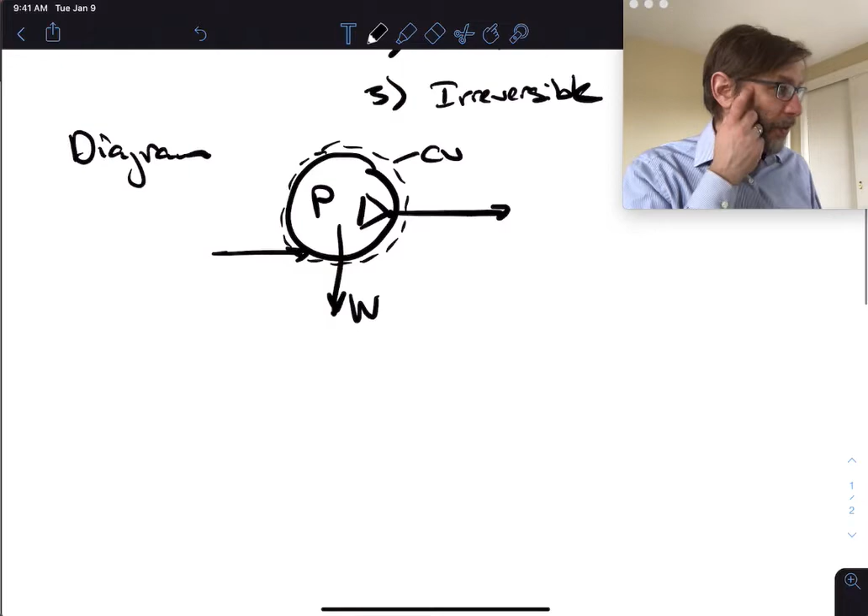No, we didn't say adiabatic. We're just trying to find the reversible work. So for irreversible, internally irreversible, we're not going to say it's irreversible, it's reversible. Okay, well, it's been a long day.

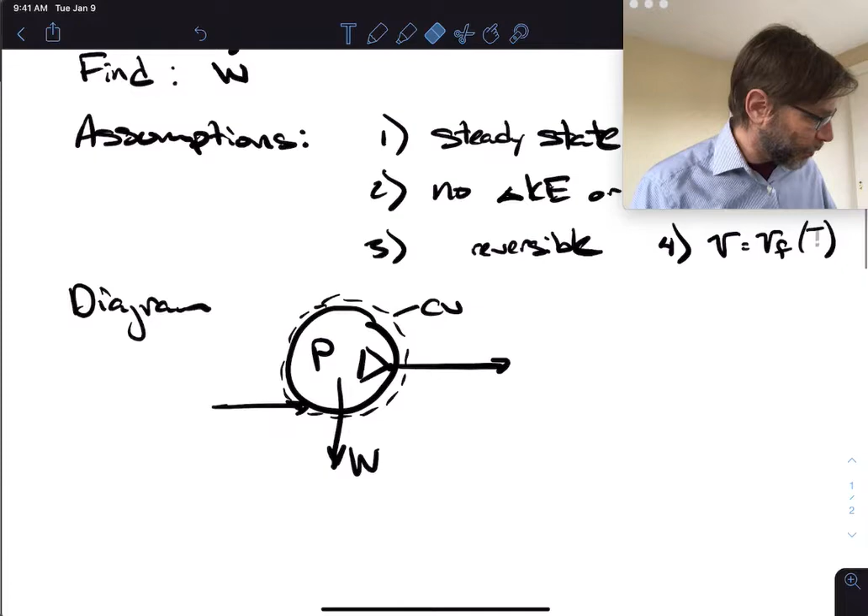Okay, four is that we're also going to assume that V equals VF, a function of temperature, not a function of pressure. So we're just going to use the VF from the table, which is what we do usually with liquids, okay? I still don't like this very much at T, as a function of T. Now,

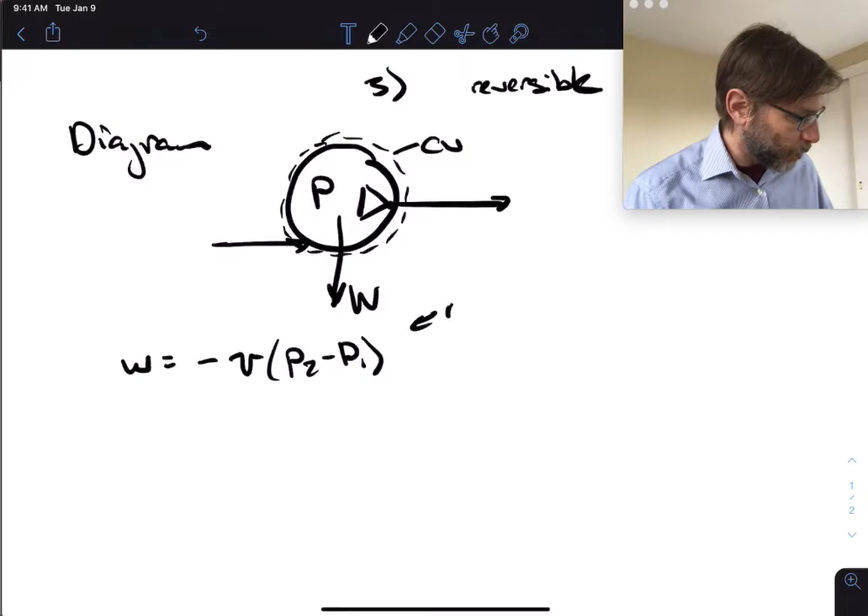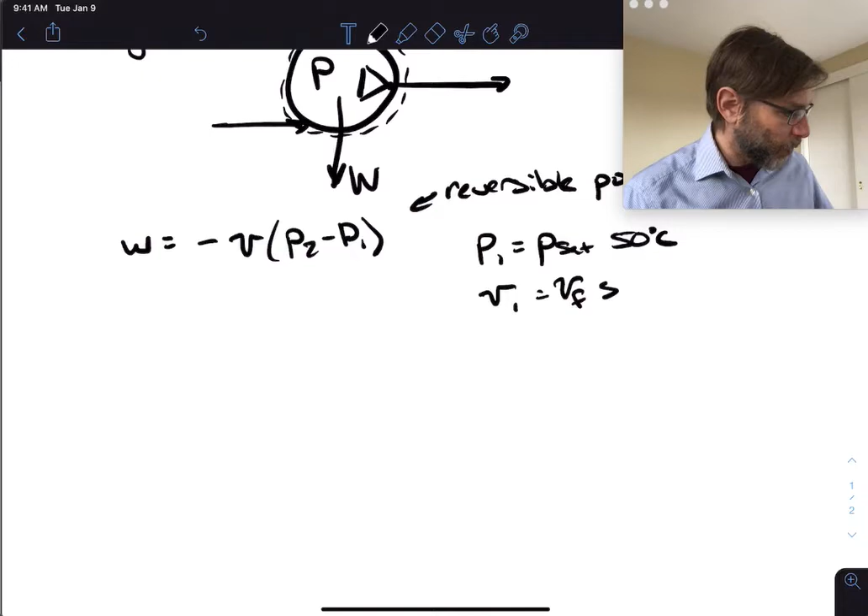All right, so what are we going to do? We're going to assume that the work little w is equal to negative V(P2 minus P1). This is for a reversible pump. It doesn't mean adiabatic, it's just reversible, okay? So P1 equals P sat at 50 degrees C, and V1 equals VF at 50 degrees C, and we'll use table A2, I believe, to find that out.

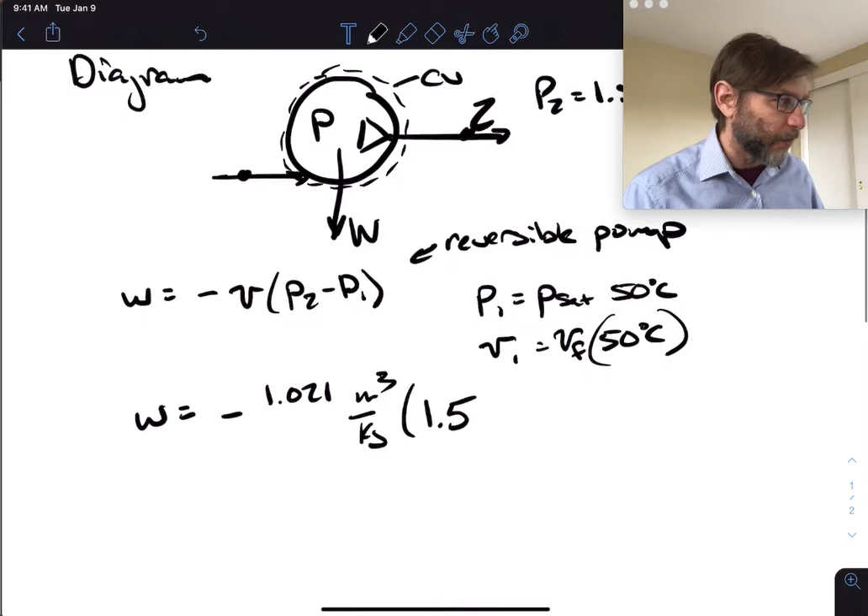And so if we just solve this thing, we have volume, and then work equals negative V, which is 1.021 meters cubed per kilogram, times... So what do we know the pressure? We know the pressure is 1.5 megapascals, right? So P2 equals 1.5 MPa. And we know P1 because P1 is P sat at 50 degrees C, right? So that's pretty straightforward.

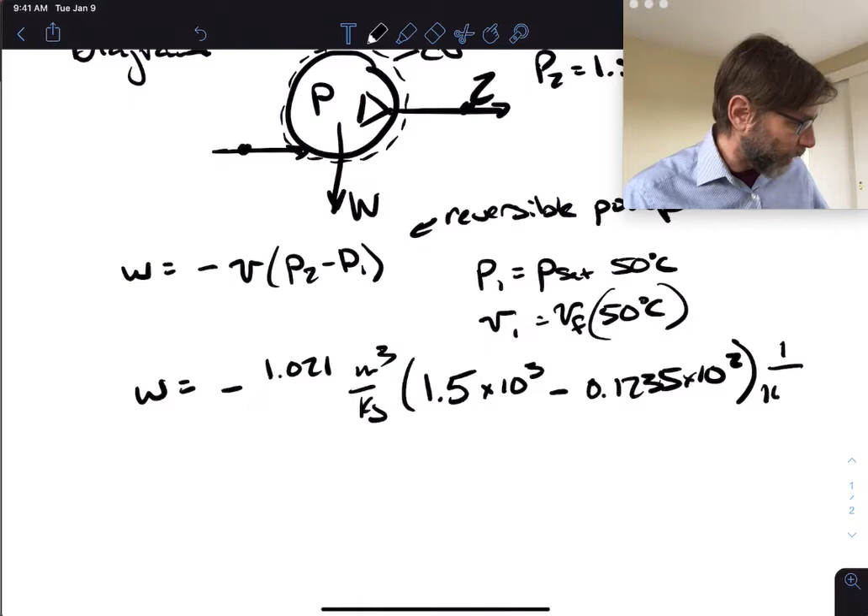So this is 10 to the third kPa minus 0.1235 times 10 squared, times 1 over 1,000. And then we're going to end up getting a negative value here, make sure to pay attention to the units, 1.51 kilojoules per kilogram.

And then so if we know the reversible work, we can calculate the actual work. So this is little w. The big W dot is equal to 30 times negative 1.51, which is in kilojoules per kilogram, so then we end up getting kilowatts. So then we end up getting 45.3 kilowatts for our final answer.

All right, so just to go back, this is from table A2. So table A2 is here, and this is the temperature table for water, and that's where we get these items here. I think these are right. I think this is right. 10 to the third, I think the units are right, but I think this is wrong.

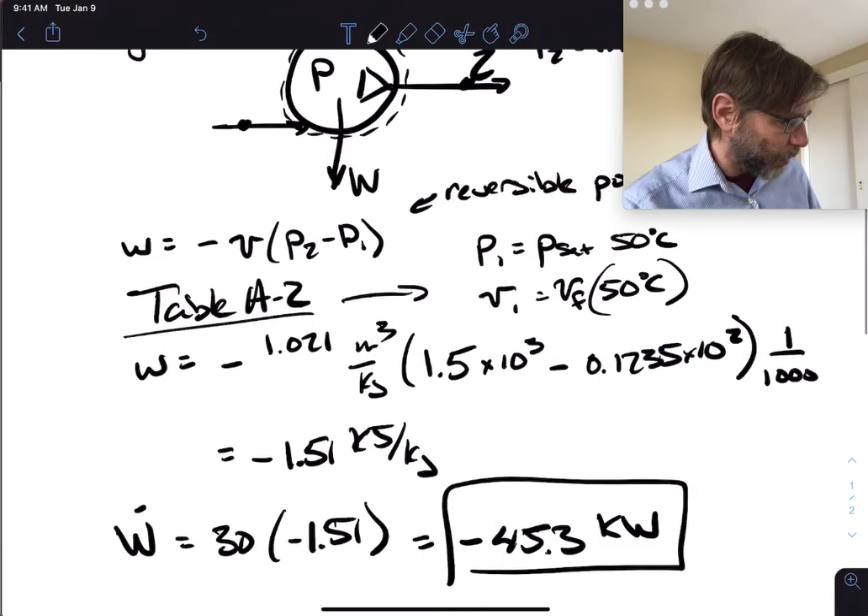Just gonna make sure this is right. Let's see, do this in pascals. No, we need the 1 over 1,000 here. Okay, so I'll have to check my units later, and I'll put the right units in there. I'm pretty sure that's correct, though. I think it might be something screwed up in the solution.

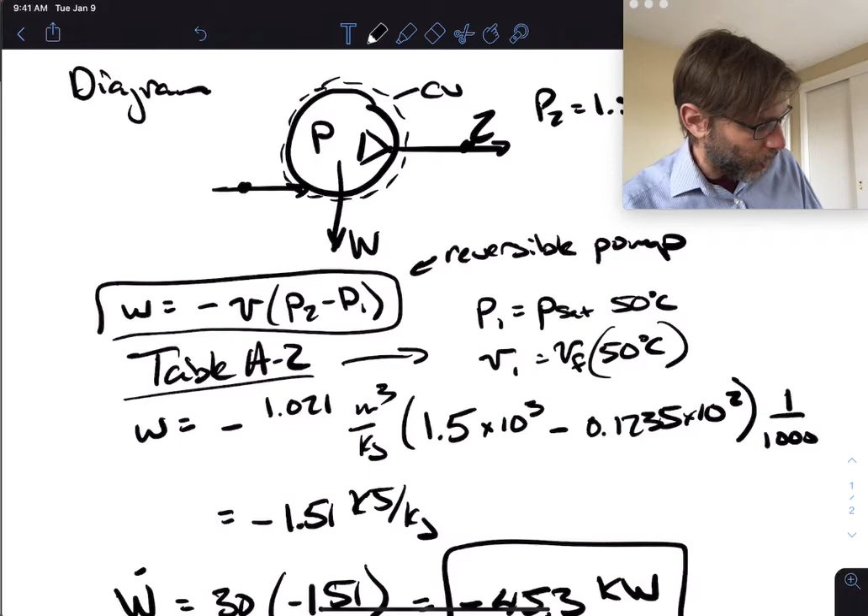But anyways, it's a pretty simple problem. This is the key equation here, and make sure we just know that this is for an internally reversible pump only, right? If it was not internally reversible, we would not be able to use this VDP equation. Okay, just remember that, and we'll deal with this later when we are doing more problems with the cycles, especially for the Rankine cycle.

All right, so that does it for chapter 6. We'll continue to review this material and keep on going through it. We're going to keep using it. So hopefully, if you have any questions, please let me know. And if it's a challenge, or you want to know something more that I'm not covering, please let me know. Also, the book, of course, is there for your reference that you can use.